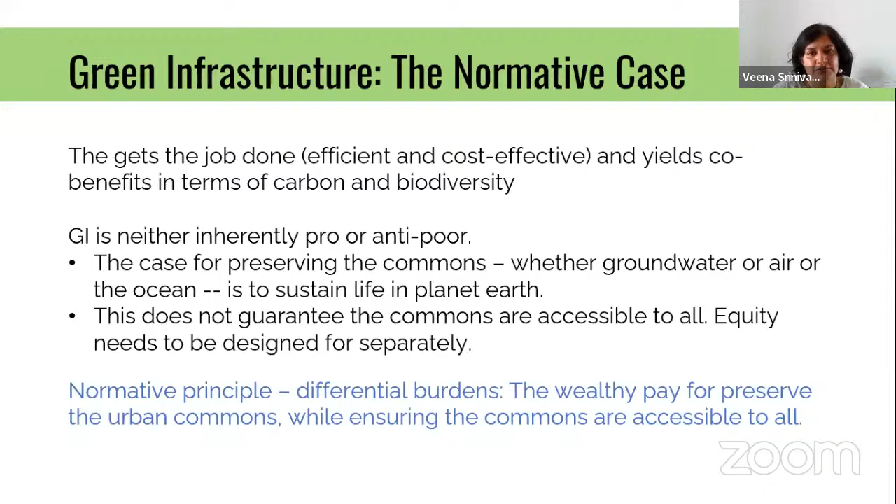Now, moving to the Indian context—obviously one of the problems we're having right now is that a lot of the discussion, the design principles emerging around water sensitive urban design and green infrastructure, are coming from the Western context. And of course, how we use our land and water in the Indian context is very, very different.

So we have a variety of purposes, and I've just shown you examples. One is very basic livelihoods, living, and hygiene, where communities continue to be dependent on our water bodies. Then there's the more emerging urban elite concerns with these urban water bodies, which include ecological aspects like bird watching and nature walks, and more of the yoga-at-the-lake, music-at-the-lake type of stuff. And then, of course, this is juxtaposed over our more traditional uses, particularly religious and cultural uses.

So when it comes to figuring out how do we design green infrastructure, the first principle is to figure out who is the community of users for this particular space and what do they want out of this space. Once we've laid out these purposes or objectives for creation of these spaces, then you can figure out what design elements would satisfy these.

Often you will find that some design elements conflict with other design elements. For example, if you need flood control, you need some of these spaces to be empty in the summer before the start of the monsoon. But if you want them used for recreational purposes, you might want a little bit of water so that you can maintain certain birding communities and roosting habitats. Ultimately, this question cannot be settled without first determining what people want out of the space.

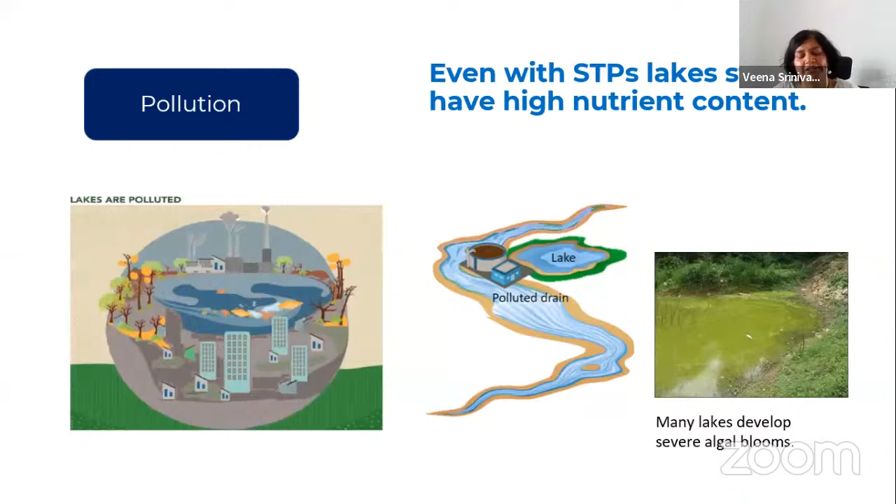The challenge here is how do we manage that nutrient balance in a very reasonable way, through use of constructed wetlands, floating wetlands, and so on. So you're uptaking some of the nutrients fast enough, ensuring that the lake doesn't tip over into the situation of having these massive cyanobacterial blooms, which are actually harmful.

And then the last bit is that often one of the simple, what I call the band-aid fix ways that our lawmakers handle the lake situation because of sewage ingress into lakes, is by building these diversion drains, where they basically build a big wall between the drain and the lake to ensure that raw sewage is not entering the lake and it's diverted around it. As a result, you have the problem of throwing the baby out with the bathwater—there's no water entering these lakes at all.

When you lose your ability to store rainwater locally, you're allowing all that rainwater to drain down and then pumping it back up a thousand feet to the top of a mountain where your city is at the top. So you're unnecessarily creating this massive energy requirement of having the water flow down and pump back up, as well as losing basically any ability to control your water security locally.

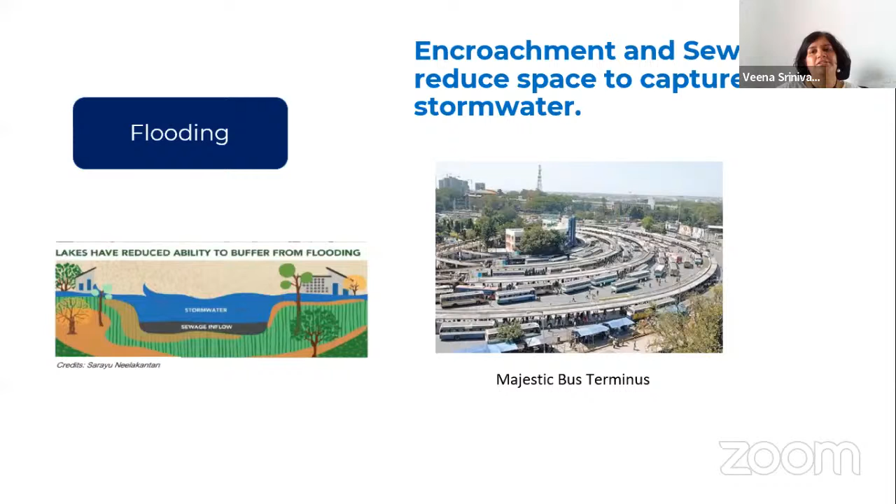Now, I would not mention this if it wasn't that lakes in smaller towns in India or South India are still being encroached. So I guess the very first step is to stop that.

Now, how do we solve this problem? I would say it involves a 4-step process: lake visioning, intervention design, blue-green infrastructure, and monitoring.

What do we mean by lake visioning? Because of that first step I talked about, where we have in India very diverse stakeholders around these lakes, the first step is basically to understand who all the stakeholders are and what they require from the lake. Doing this cleverly—which some lakes like Jaipur and Bangalore have done very well—doing this very sensitively to ask who are all the people who depend on this lake for livelihoods.

How do we ensure that we very cleverly put in physical infrastructure so that their needs are met without impinging on the benefits and enjoyment of the lake for other people? So if it's a Dhobi Ghat, then can we separately—instead of having them spoil the lake water—can it be done separately on one of the side drains?

If it's rituals like Ganesha immersion, most lakes in Bangalore have now created separate ritual ponds, what they call Kalyanis, so that only that is messed up and the main lake is kind of preserved. They do a very good job of managing the solid waste around that much smaller ritual pond. So the imagined physical vision of the lake emerges only after you understand who the stakeholders are and what they want out of it.

And then you set what the parameters are for how much area for cycling, how much area for birds, where is the nature zone of the lake, whether you want to use a zonation model or an interspersed model. All of this emerges once you've got the physical imagination, then you set what you call the service level benchmarks.

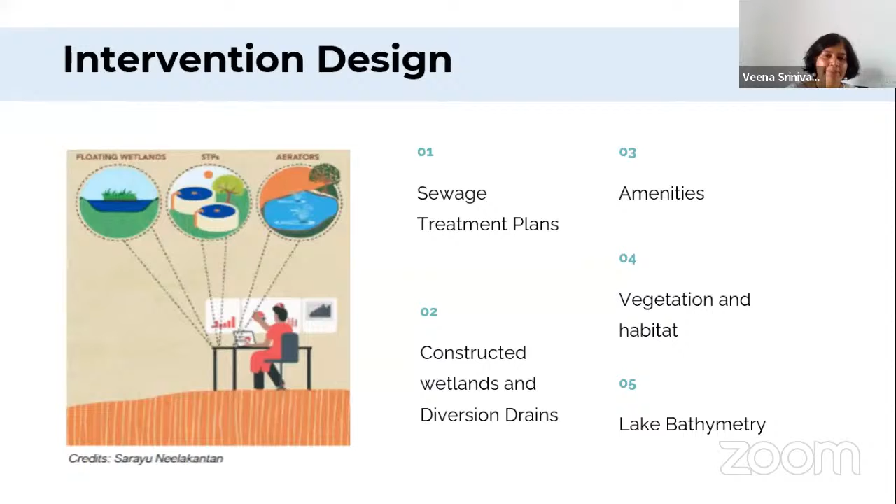The fourth and fifth ones I want to mention get a little short shrift in our Indian context, which is the ecology component. One thing we've realized working with ecologists around Bangalore's lakes is that design of the bathymetry of the lake matters. Instead of a soup bowl, how can you make a gradation design? How do you classify lakes into small and big lakes, and imagine different ecological functions they might serve? Small lakes might be meant for small birds and small fish, while big lakes are meant for commercial fishing and pelicans. So instead of a piece-by-piece approach, take a landscape approach, looking at all your big and small lakes as a matrix, where different ones have different functions and purposes, and therefore the design of the bathymetry and habitat can be very variable.

The third piece is the blue-green-gray infrastructure plan, and here I think in India we have a big problem - we really don't have good simulations. I'm a modeler, so I love simulation of blue-green infrastructure. But one of the big problems is that our sanitation plans, or sewerage plans, and our stormwater plans don't talk to each other. We're really talking about systems where sewage is going into stormwater drains and then entering these water bodies. So if we don't separate our sewerage and stormwater plans, saying at which points they intersect and what the treatment of water is, that needs to be properly simulated with a proper consultant brought in to develop a blue-green-gray infrastructure plan. That's a huge gap.

And then, of course, there's the regulatory structures, the operational plans, and the capacity building of agencies to handle this. We are barely able to get our agencies to have staff capacitated to run sewage treatment plants. Now we are talking about them handling blue-green-gray infrastructure. The capacity simply doesn't exist.

And then financing remains an issue. In India, at least to my understanding, financing has remained restricted largely to gray infrastructure. Green infrastructure financing is still kind of small scale, philanthropically funded. So how do we change that so we're able to get service level benchmarks for our green infrastructure as well?

And the last bit is how do you ensure that - I'm talking about lakes, so lake health, but in the larger case, green infrastructure - is actually healthy in the long run. In the Bangalore case, we did many consultations to figure out the minimum set of things we need to be monitoring over time to ensure our lakes are healthy: physical assets, biological assets, and water quality. For water quality, it became a question of which parameters. After a long set of consultations, we decided the most important things are the three that go into the trophic status - phosphate, transparency, and chlorophyll A - which determine whether the lake is eutrophic or hypereutrophic, and that's the most important thing.

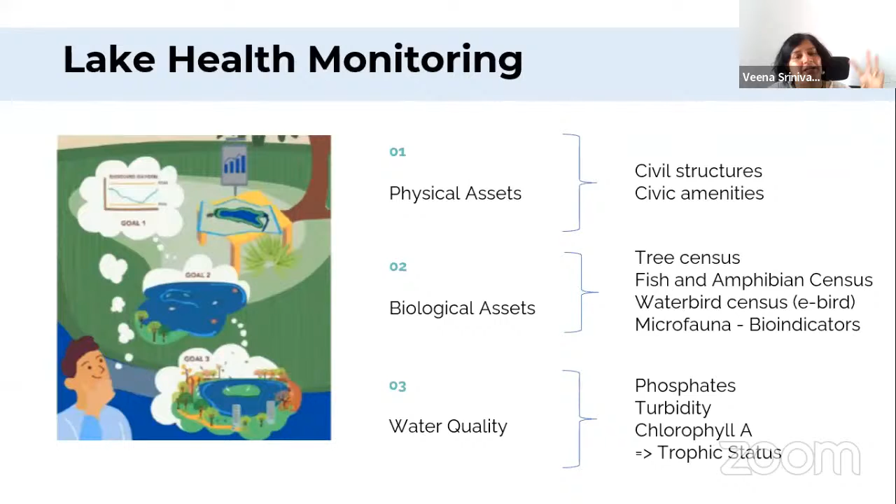This requires some contextual work in our Indian context. As I said, we need to really do this for each of those large typologies of the socio-hydrological context we're talking about. Thank you very much for listening, and thanks for the invitation.

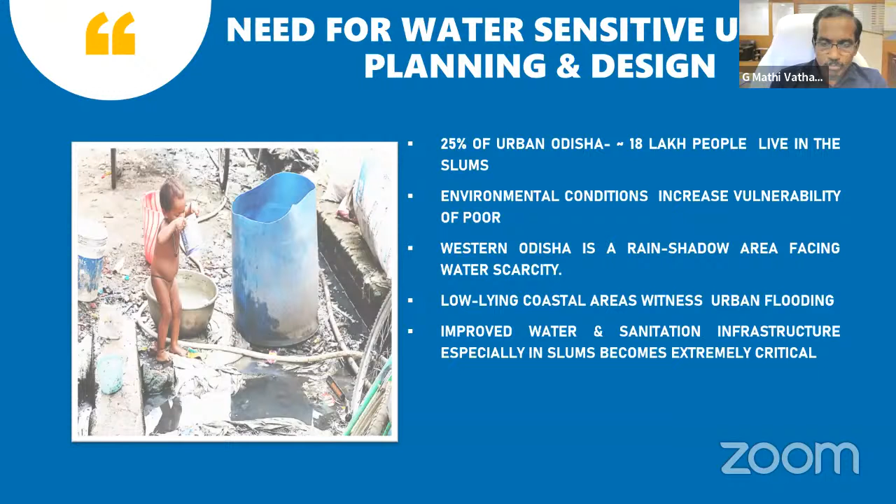They witness urban flooding every year, and currently also there is large-scale flooding. This makes climate resilient and improved water and sanitation infrastructure critical for making our cities water sensitive.

Our focus has been on harvesting the rainwater as much as possible, the Catch the Rain campaign, and access to safe tap water at every home. When we talk about water sensitive, we want to talk about water security, especially for the urban poor.

When we talk about sanitation, we need to talk about access to individual household toilets and achieving open defecation free status, and also open discharge free status through safe treatment and disposal of sewage.

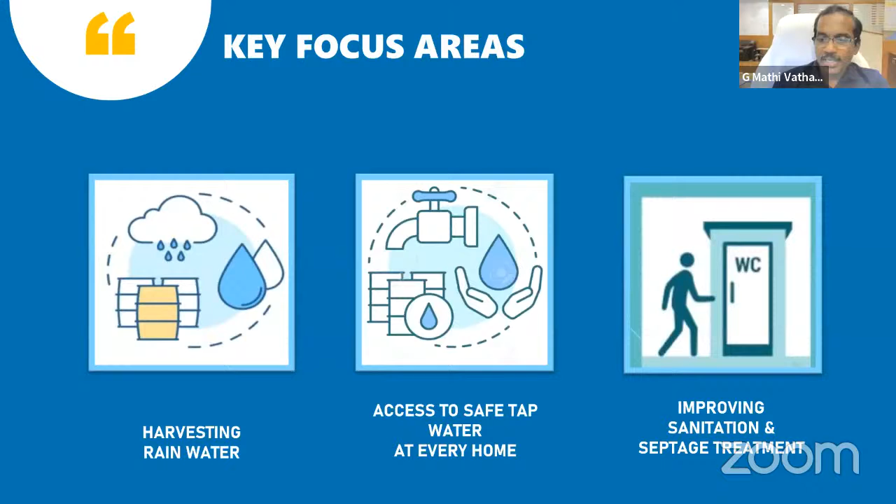Under Mukta, our flagship program launched during the COVID pandemic, which has now become a regular scheme, we take up climate resilient, community-based blue-green infrastructures. Rainwater harvesting structures have been one of the major components of this project.

We started the Catch the Rain campaign sometime in 2020, in partnership with CSE, thanks to Dr. Suresh, who signed the agreement with us. CSE has been our knowledge partner, helping us transfer knowledge to our engineers and planners in the cities and corporation areas.

In 2020, we took this up on a pilot basis, focusing on 5 major large corporations and development authorities. About 500 rainwater harvesting structures were taken up in the first year, focusing on vacant land, public parks, playgrounds, and open space available in government as well as private institutions, colleges, and hospitals.

Our USP is that we implemented the rainwater harvesting structures in partnership with the community, with Women's Self-Help Groups and the Slum Dweller Association, on a big scale.

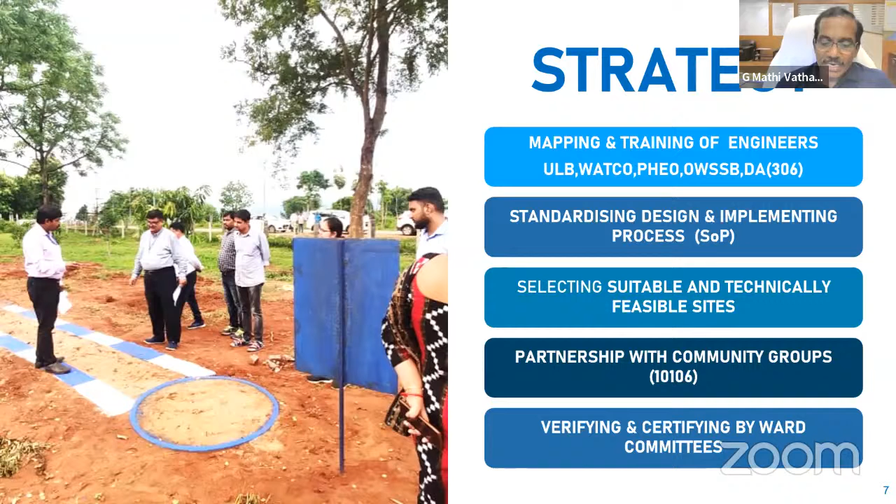We have come up with standardized design and implementing protocol, partnered with community-based institutions like Women's Self-Help Groups and the Slum Dwellers Association, and the ward committees have been roped in for verifying and validating the construction and maintenance.

In 2020, we achieved 500 rainwater harvesting structures on a pilot basis. In 2021, it was in campaign mode, where in 60 days we achieved, and in 75 days we achieved 10,000 rainwater harvesting structures. We even had a tweet by the Honorable Minister, Government of India.

In 2022, we expanded our scope, brought in additional players, and in 60 days we achieved 20,000 rainwater harvesting structures. By July 19th, we hit the magic number of 22,222 rainwater harvesting structures, all done by our community partners.

When we talk about city-wide inclusive sanitation, we need to talk about the availability of water, access to safe, clean water at the household level, and access to toilet. When we talk about the toilet, we don't mean public toilets and community toilets. We talk about access for individual families to an exclusive toilet.

We realize that in the ODF campaign, we achieved ODF status, but the community toilet system, where you tag an urban poor or slum settlement to a community toilet, does not ensure the sustainability of ODF. We have seen how communities lapse from ODF status. So we realized that access to individual household toilets is a non-negotiable agenda for us. That alone can ensure sustainable ODF in the cities.

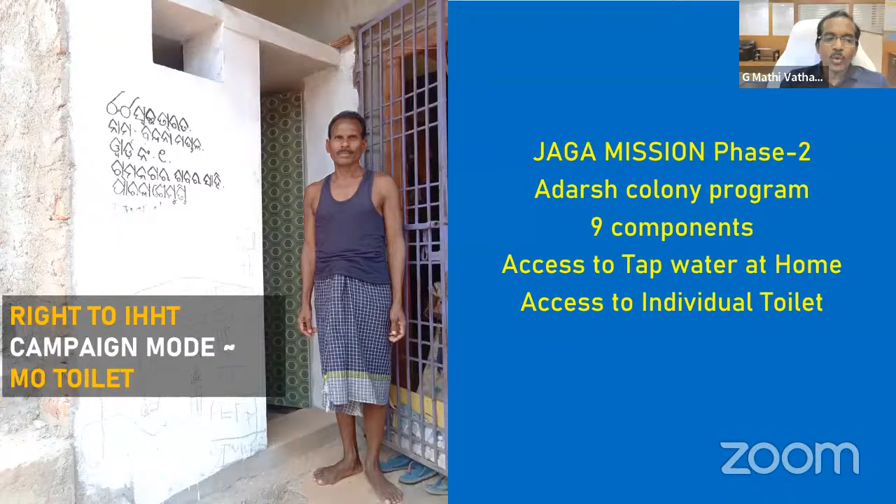So as part of Jaga Mission phase 2, we have included the right to tap water at home and the right to an individual toilet as essential components of our Adarsh Colony program, our phase 2, that is transforming a slum into a livable habitat. Our philosophy is right to tap water at home, right to individual household toilet, and we have taken up this toilet mission on a campaign mode.

For the individual, there is a subsidy of about 8,000 rupees, which may not be sufficient. So we are leveraging SBM Urban, PMAY, the 15th Finance Commission grant, and other resources available to provide enough subsidy for the poorest of the poor who are yet to make individual toilets even after 7 years of SBM.

The innovation we have made is that if land is not available proximate to the household, we identify community land within the slum area in clusters and make clustered toilets. But the individual toilets are in cluster form, where every seat is earmarked for a family with a separate lock and key, and maintenance of that seat is the responsibility of the household. Whereas common infrastructure like water supply and electricity is maintained by the Slum Dweller Association.

It is a joint venture of individual households and the Slum Dweller Association, which under the Jaga Mission plays a critical role in ensuring slums are saturated with 100% household toilets and 100% household tap connections, and are declared open defecation free, maintaining that status. Ownership is now given to the Slum Dweller Association, which has signed an MOU with the city commissioner as part of the Jaga Mission.

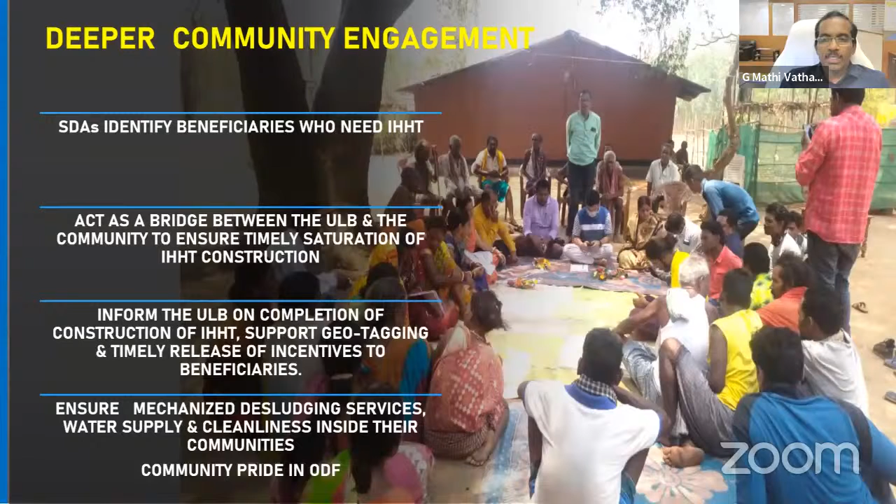The city transfers funds for capex and opex to the Slum Dweller Association. We have amended our Odisha Municipal Act to earmark 25% of available capex funds to the Slum Dweller Association for spending in urban poor areas. We have strategy, policy, guidelines, and IEC materials for making this toilet mission a reality, with deeper community engagement ensuring tap water and individual toilets are available for every household. The community takes pride in declaring slums open defecation free.

The Slum Dweller Association has identified more than 80,000 families who were earlier dependent on community toilets and are now due for individual household toilets. We have made cost-effective prototype designs for this. We are converging funds from various sources like Swachh Bharat Mission, Jaga Mission, and Pradhan Mantri Awas Yojana, and the saturation of 100% toilets is verified by the community. We have put in a social audit system where Women Self-Help Groups and the Slum Dweller Association verify each toilet constructed for individual households and its continued usage, then certify it.

Coming to FSSM, as I said, when we talk about sanitation, we talk about open defecation free, as well as open discharge free, to make sure septage is not indiscriminately discharged in the open.

5 years ago, when we started the journey, only 3 cities had a partial sewer network. There were no septage treatment plants, open defecation was rampant, and open discharge was rampant. There was no FSTP, and all the cesspool vehicles were discharging the septage in the open field only. 98% of the fecal matter was contaminating the groundwater and surface water, there was an absence of public awareness, and there were no FSM regulations.

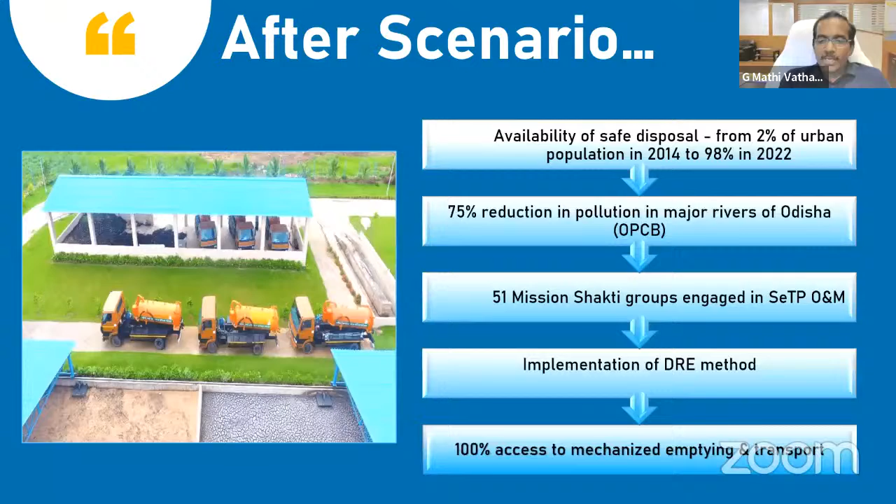We have ensured 100% access to mechanized septage desludging mechanisms, and we have partnered with women self-help groups and transgender groups. 106 FSTPs have been set up in 105 cities, and we have planned to saturate the entire state, covering all 115 cities by December 2022.

These are some photographs of the FSTP plants, where we are engaging the women self-help groups end to end in the sanitation value chain, right from constructing a public toilet or community toilet, maintaining the toilet, to owning the cesspool vehicle, operating the cesspool vehicle, and operating and managing the FSTP plants. End to end, we have engaged the women self-help groups and transgender groups.

Coming to water security, access to tap water has been our philosophy. In 2015, this was our scenario, common to any other city. Only 40% of the areas had network, only 30% of the population had house connections, with erratic and intermittent supply, and disparity in water availability within the city as well as between cities.

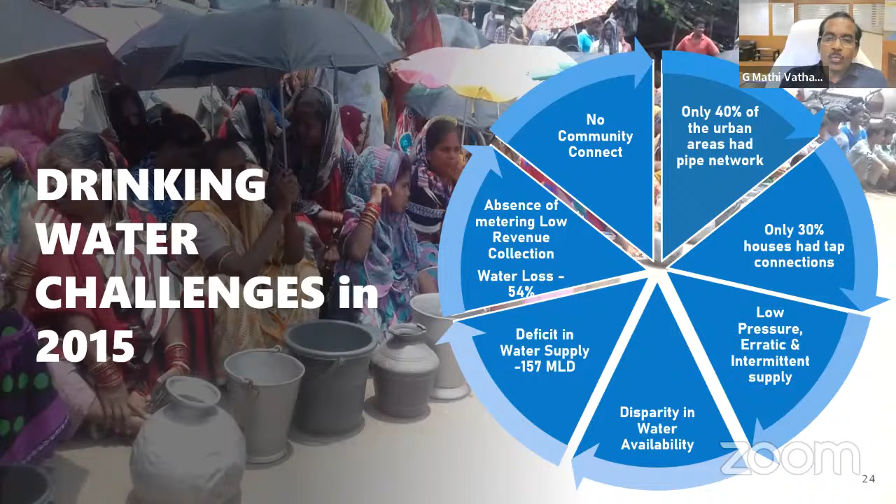There was a huge deficit in water availability, a 157 MLD shortfall. There was no metering, and revenue collection was poor. Water loss was to the tune of 50 to 60%. And frequent incidences of jaundice, hepatitis, and diarrhea were the order of the day.

We had a vision to ensure 100% house connections with tap water, with adequate quantity and reasonable quality in all houses. We started the mission, and now we have reached the Sujal mission, the drink-from-tap mission. The principle is the right to assured quality tap water at every home. Now in 2022, I'm happy to share that 97% of households have access to tap water.

We have increased household connections from 3.3 lakh to 9.8 lakh now. Out of 115 cities, 85 cities have achieved 100% house connection status. They are declared as 100% house connection covered.

We have also moved to a higher orbit, from drink-from-tap to providing 24/7 directly drinkable quality water in house taps, being implemented in four cities. We started with Puri, covered Bhubaneswar, Cuttack, and Berhampur partially, and it's being implemented in altogether 20 cities. Right now, about 6 lakh population have access to IS 10,500 mineral quality water in their homes.

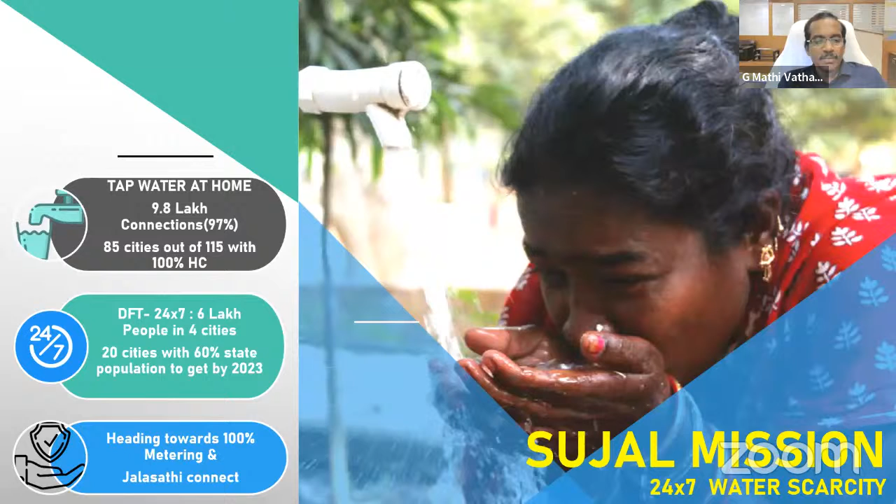By 2023, we expect to achieve drink-from-tap in all 20 cities, with 60% of the state's population getting access to IS 10,500 water. We started with zero metering, as I said. Now we are heading towards 100% metering, with focus on revenue collection to ensure sustainability. We have also deployed community partners in the management of water distribution.

Jalasathis are our community partners, women self-help groups empowered to manage water distribution at the ward level. They act as a bridge between the water supply authorities and the consumers, and they work on a performance-linked incentive basis. This is the impact of our investment and initiative in water.

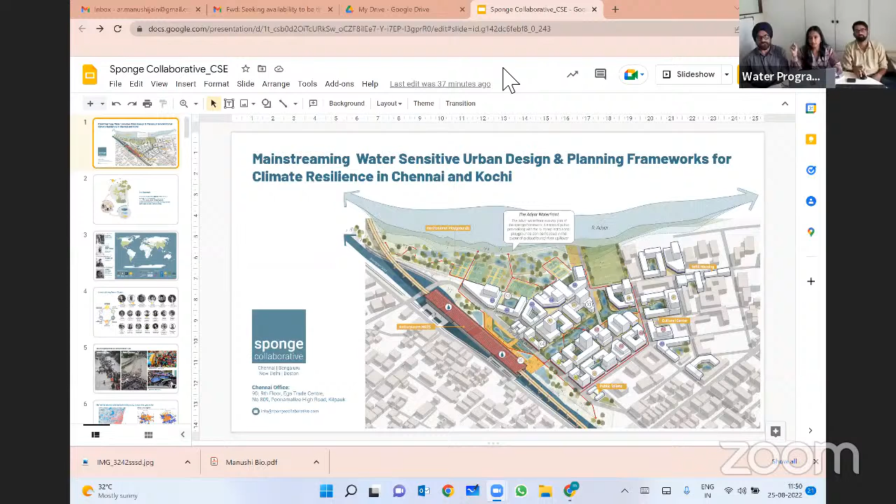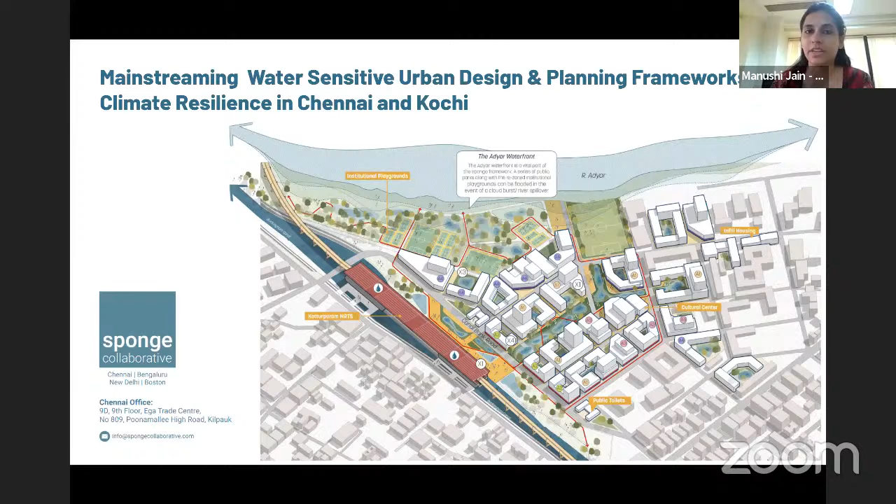Hello everyone, good morning, and thank you for inviting us to this webinar. I'm going to share today a little bit about our projects and the work that we do at Sponge Collaborative, the vision that we have for water sensitive urban design and planning frameworks through some of our projects in Chennai and Kochi. We're a strategic planning and design firm based in Chennai and Bangalore.

We take a systems approach where we foreground ecology and community in the forefront of all the design projects that we do. We integrate blue-green infrastructure, sustainable mobility, look at inclusive housing, and create vibrant public spaces for creating resilient cities.

Before we started Sponge Collaborative about 2 years ago, the 4 of us in the partnership were involved in working with a lot of public and private sector clients in our previous experiences with Sasaki, AECOM, SLA, and we worked across 60 cities in the world before we came back to India and decided to start this. Today we're a team of about 20 experts, all interdisciplinary, and we bridge the gap between urban design, architecture, landscape architecture, social development, and take it all the way to implementation projects and product design.

How we began our journey is we are a group of people aware of the climate risks happening in Indian cities like flooding, heat waves, and droughts. Most of this is because of unplanned urbanization, or outdated and unregulated infrastructure. How we are trying to tackle these issues is by promoting nature-based solutions and looking at 4 key principles while doing that.

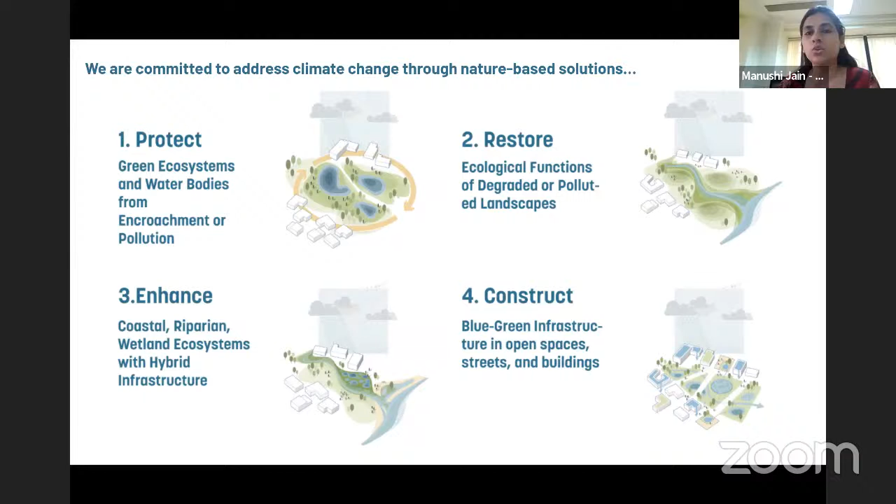We look at how we can protect the existing landscapes that are already there, which can provide the benefits of a nature-based solution. We're trying to restore the critical riparian edges, and enhance existing ecosystems which may be degraded or polluted, and construct new infrastructure, which we call blue-green infrastructure, within the urban fabric.

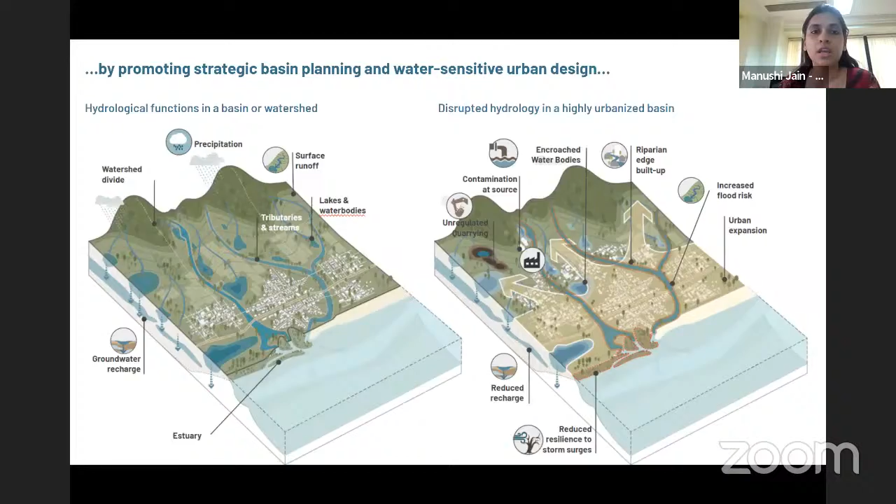How we're promoting this is we take a strategic basin level planning approach where we identify the issues at the largest scale and then try to come up with solutions for them. In any typical urban fabric, we know that most of the surfaces are impermeable, and because of that there's a lot of surface runoff during a cloudburst event, which leads to flooding.

Now, by leveraging our open spaces, streets, and buildings, and by mainstreaming the blue-green infrastructure planning approach, we can mitigate the flooding and create infrastructure that can hold and delay water before it overwhelms our system, thereby making it more resilient.

This comes with multiple co-benefits because you're able to recharge your aquifer, do rainwater harvesting, bring in urban greening and biodiversity, cool the microclimate, improve the air quality, upgrade our public realm, and also create placemaking.

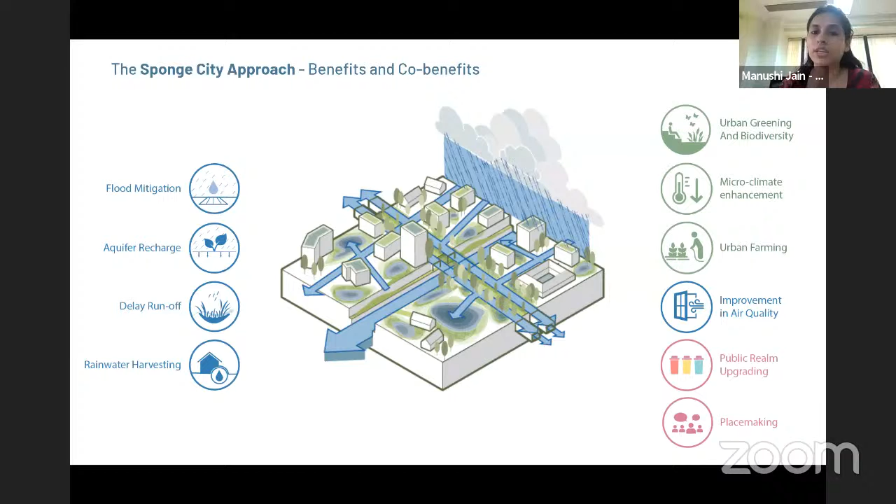Today I want to show 3 different scales in which we are trying to bring this approach in our projects, from strategic basin planning to sponge planning neighborhood framework, and then also how we're demonstrating it through pilot projects through sponge open spaces. So the first project is the Adyar River Basin Vision.

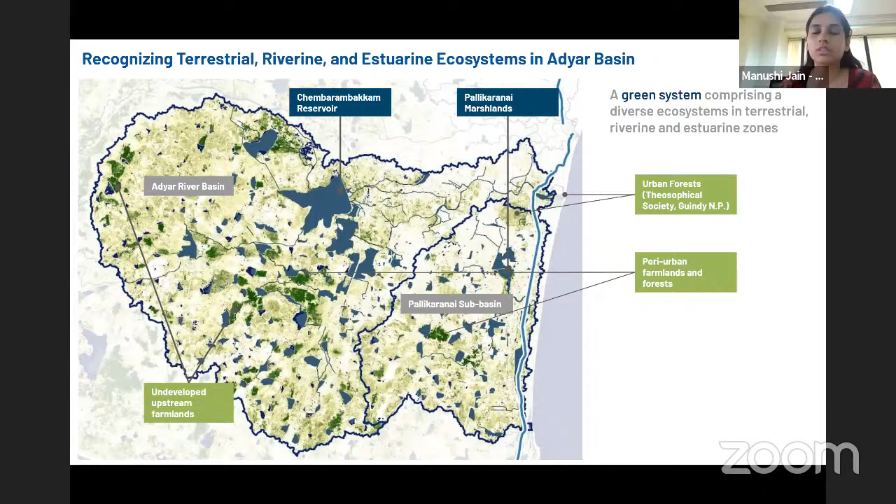Adyar is one of the most urbanized rivers in Chennai, and it faces issues of flooding and sewage disposal. Chennai city comprises about 5 major basins, and the Adyar Basin itself is a very critical hydrological system comprising a network of streams and catchment areas. It also has a very interlinked green system with diverse ecosystems of terrestrial, riverine, and estuarine zones.

How we began this project is we started with a rigorous data and visual mapping exercise, because a lot of open source data is not sufficient or does not actually cater to all the existing conditions. So we also did a visual mapping where we walked the entire stretch of the river and monitored it.

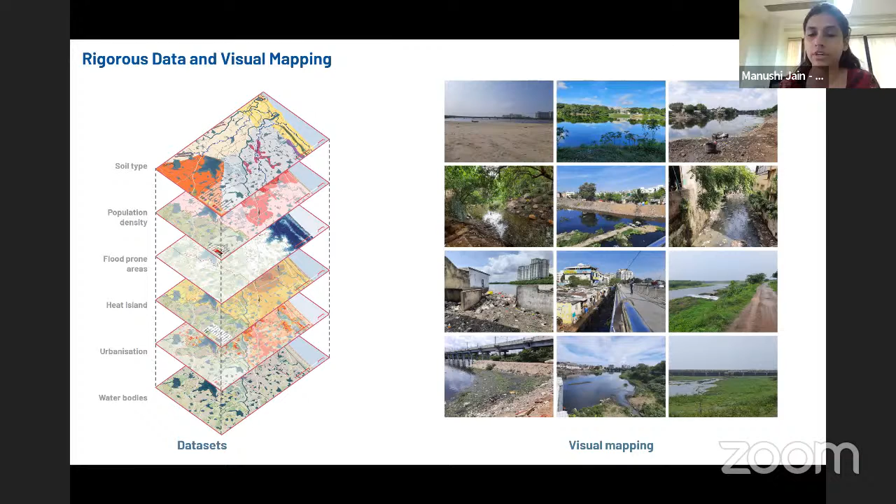We came up with thematic maps to raise the issues of flooding and infrastructure risk that the river is facing, as well as accessibility problems in the river, and mapped some of the existing open reserve lands around this river.

We also looked at the land use, the logistical corridors, and the predominant urbanization growth patterns along the river. After we initially did our data mapping, we held a technical stakeholder workshop.

Based on all the feedback we received in our technical workshop, we consolidated all that data and information to create 5 different frameworks, which would help us understand how urban growth can be tied into ecological rejuvenation and help in long-term metropolitan planning, by identifying within these frameworks goals and strategies and pilot projects that can be implemented.

We looked at how the river can serve as an ecological corridor connecting the blue-green systems, how it can serve as critical infrastructure by having riparian resilient edges, and looking at it from the perspective of culture and livelihood as a connecting tool by which neighborhoods can identify.

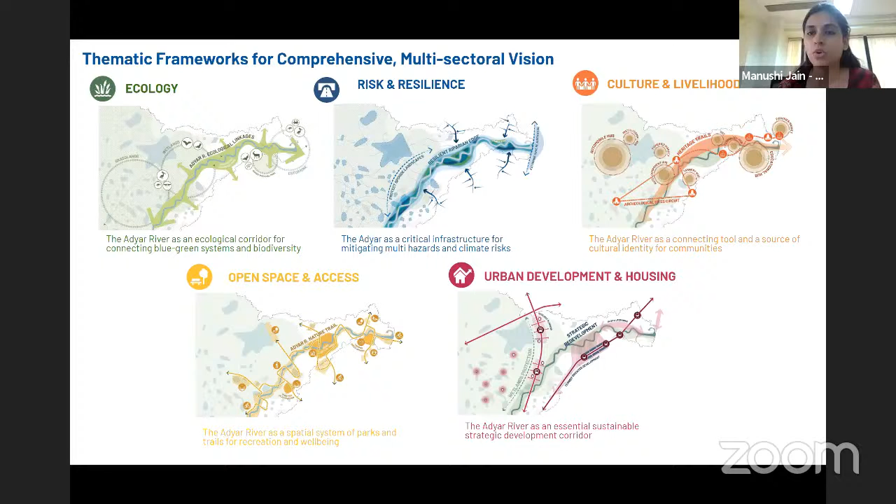We took all of these different strategies and started demonstrating them through visuals of transects, like urban visuals. These are speculative visions—they don't necessarily have to be implemented this way, but they help begin a conversation.

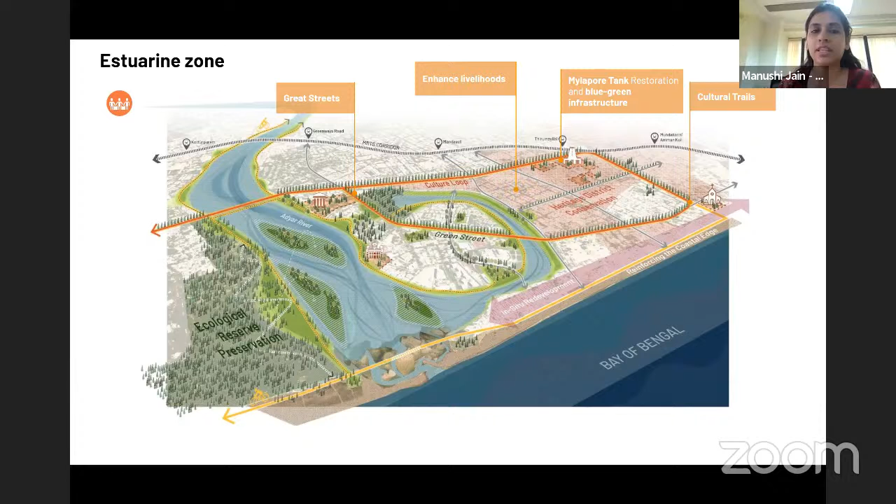We proposed multiple strategies and projects, phased into short-term, medium-term, and long-term projects, and looked at even peri-urban zones, which are rapidly urbanizing with new infrastructure proposed. So what does that mean for the city?

When all of these strategies are achieved, this is what the vision of the city, the Adyar River, would look like, and this is how it could integrate with our city itself.

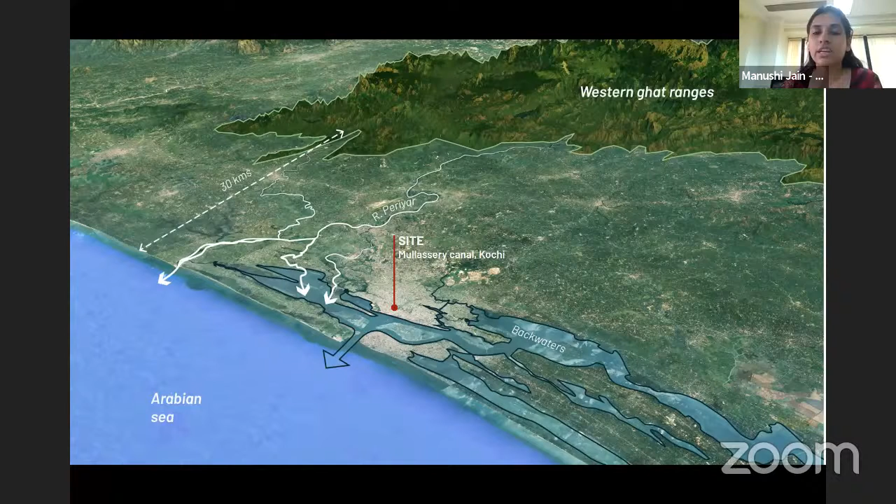Now, the second scale I want to talk about is the sponge planning framework, or the neighborhood scale. We always take the metropolitan or regional approach in understanding our sites. This is our site in Kochi, the Mulassery Canal, in Ernakulam, which is a system of backwaters very close to the Western Ghats.

Two of the predominant issues they face are decreased greenery and flooding. We are looking at a 1.3 kilometer stretch of the Mulassery Canal, which is mostly covered and probably just used for sewage disposal now.

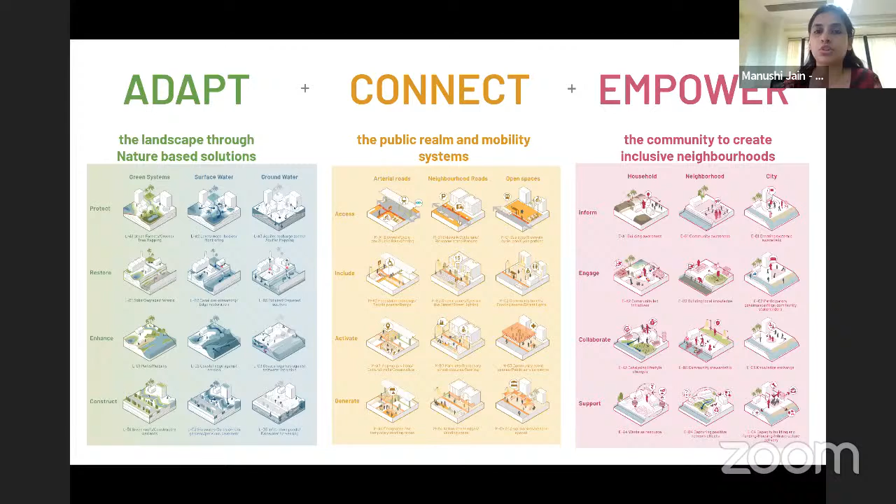We came up with toolkits, starting off with the Enter Kochi competition. In the competition, we created a toolkit not just for nature-based solutions, but also looked at the mobility system and the community system.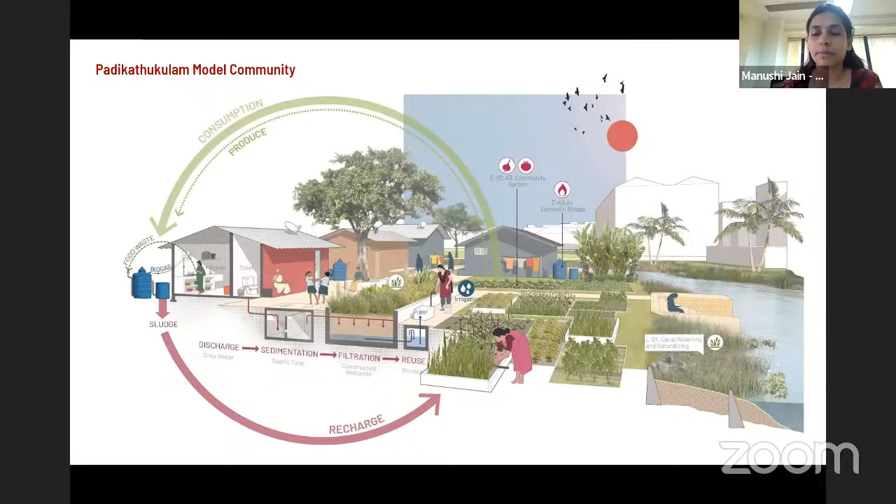We created a larger framework for the canal and its surrounding areas and proposed pilot projects within it as well. Now I'd like to explain a bit about our process after the competition, when we got onboarded on the project.

We began with a bunch of stakeholder engagements and getting buy-in from community representatives for the design ideas we had done preliminarily at the competition stage.

Then we got into the details of understanding the site more and devised an entire canal master plan framework, where we came up with strategies for daylighting and also strategies for canal widening, making more room for the canal and creating resilient riparian edges.

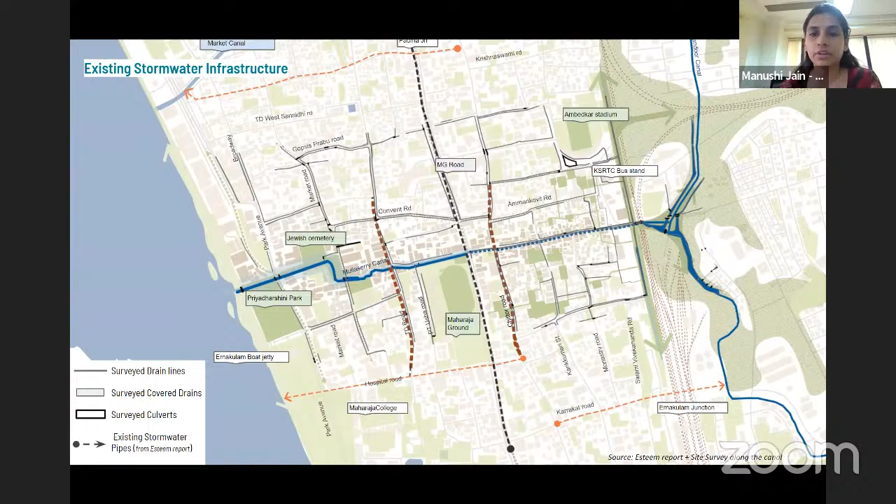For the entire neighborhood itself, we wanted to address how we can tackle flooding issues during a cloudburst event. So we began by understanding the stormwater infrastructure of the neighborhood and mapping out which areas flood during a cloudburst.

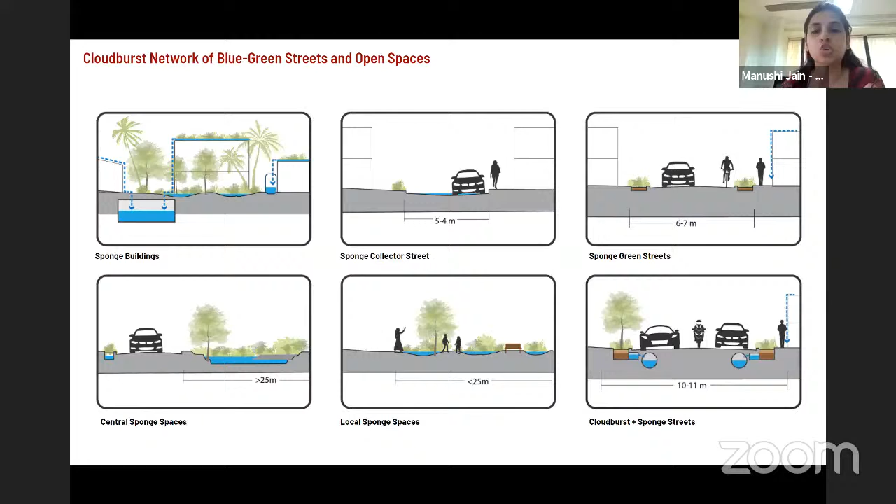So we introduced a network of blue-green streets and blue-green open spaces, creating a toolkit of collector streets, green streets, sponge open spaces, and local sponge spaces, which when integrated within our fabric could help in flood mitigation and allow aquifer recharge, or at least delay the water before it hits the larger water system.

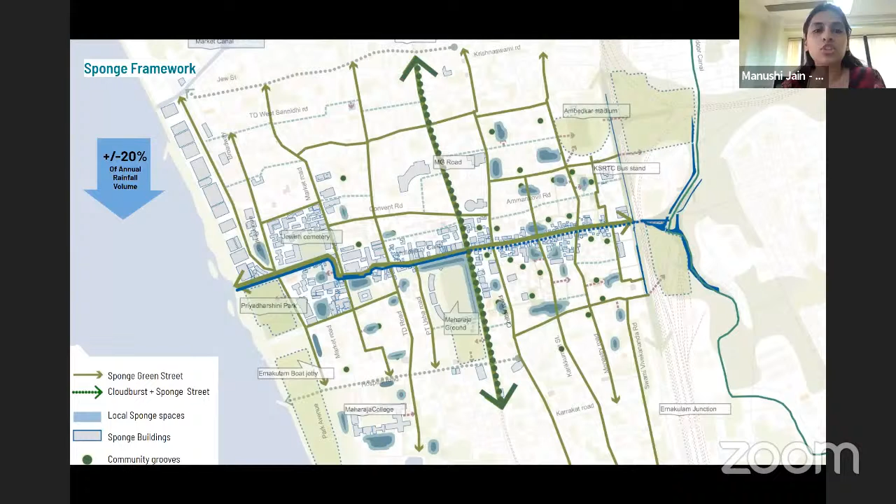So we demonstrated what that means during a 10%, a 20%, and a 70% annual rainfall. Thereby, you're saving all of your critical infrastructure and having very curated areas, identifying critical areas that are allowed to flood.

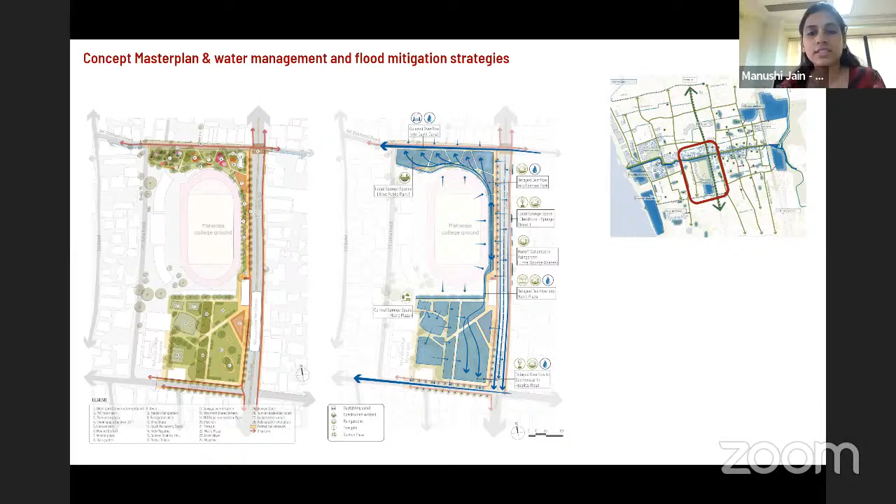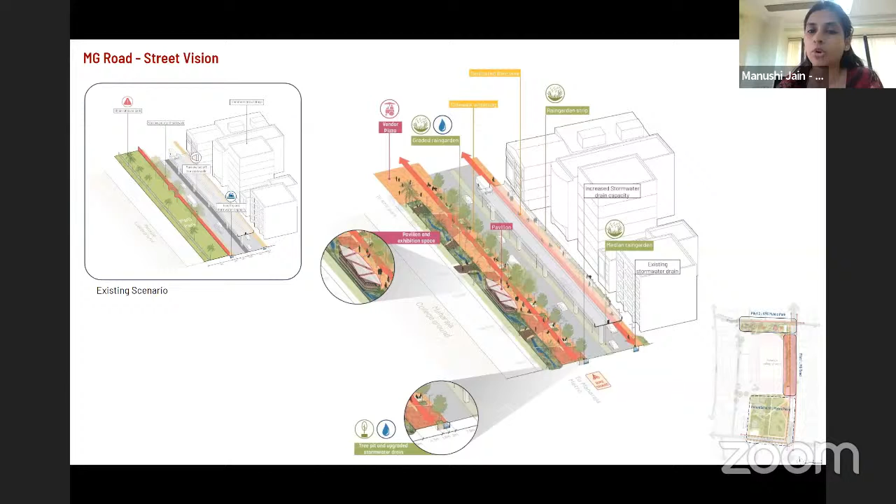Now we took this all the way to a detailed project report from a framework level, where we identified a sub-site and demonstrated how a collector street could be designed. The existing MG Road had a lack of sidewalk, lack of street light, and was unsafe for women and children. We transformed it into a boulevard with rain gardens, cycle tracks, and tree pits, enhancing stormwater infrastructure while also enabling placemaking and creating a good streetscape. We demonstrated how water movement would follow the proposed design, and how these infrastructures have multiple benefits of resiliency in mitigating flooding.

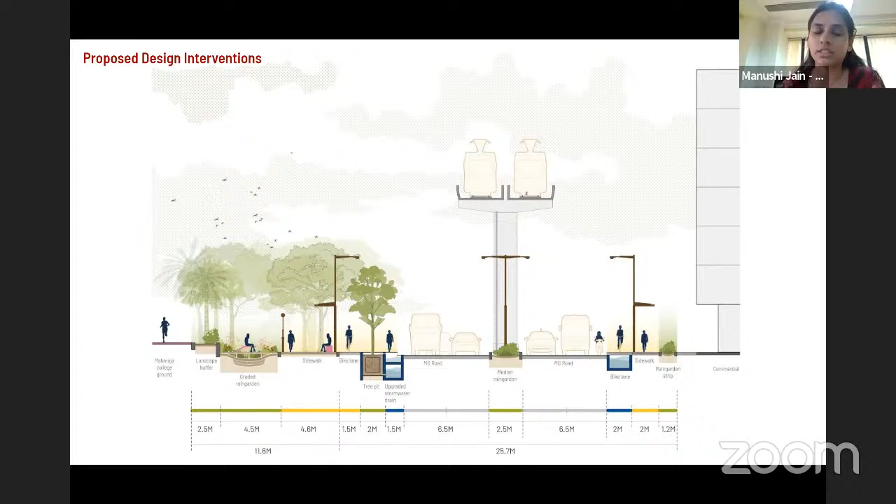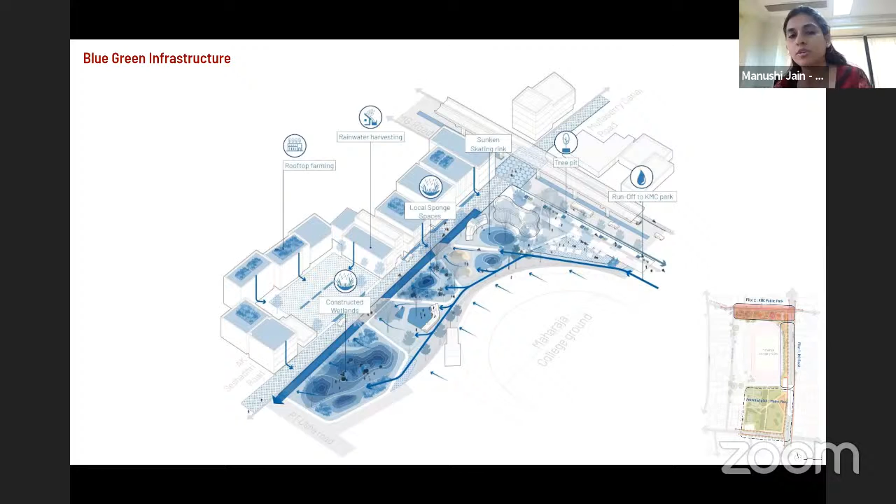And we did the same for an open space. There was a dilapidated public open space owned by the Kochi Municipal Corporation. We came up with strategies for proposing NMT, creating a woonerf, daylighting the canal, and also promoting livelihood by creating vendor zones, demonstrating the same in terms of a blue drawing to show what the water movement would look like after the site is regraded and we've introduced blue-green infrastructure. This is what the vision would look like when completed.

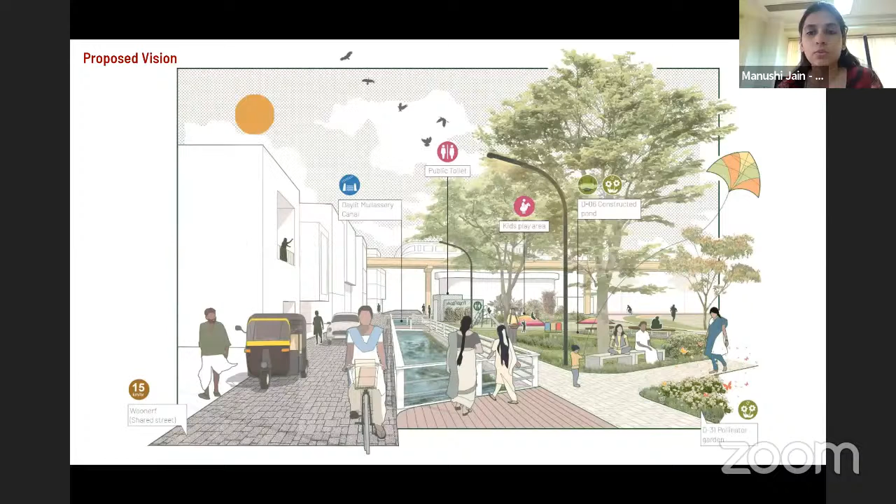And then we took it all the way to detailed drawings and bill of quantities. This document was submitted to the Kochi Municipal Corporation, and we are hoping for the implementation to happen. Through this project, we also identified the stakeholders and have engaged them all in the process.

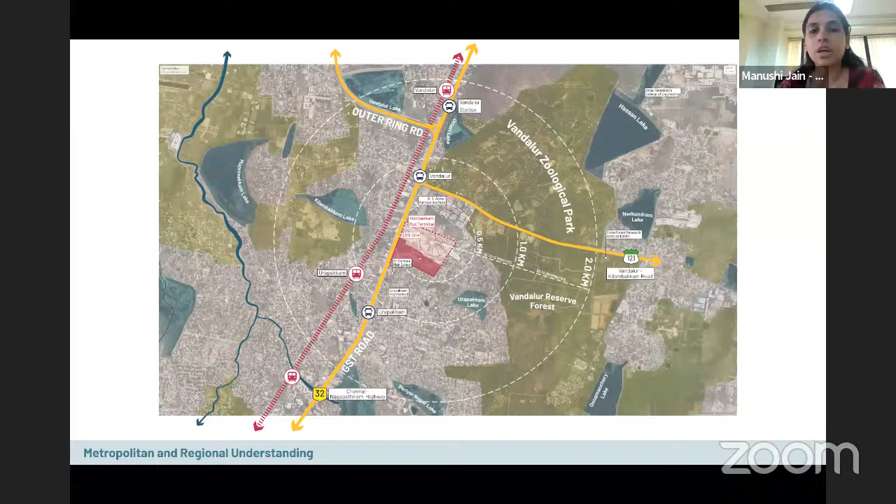At the third scale, because metropolitan scale or planning framework scale projects take a lot of time to get implemented, we also look at quick win projects like the sponge open space. We're currently doing one in the Kilambakkam New Mofussil bus terminal, located at the south entrance at the GST, Grand Southern Trunk Road in Chennai. It's a southern gateway to the city and part of a larger system with the Vandalur Zoological Eco Park in the Reserve Forest, connecting to a larger system of lakes around the site. The new Mofussil bus terminal is being constructed by the Chennai Metropolitan Development Authority, CMDA.

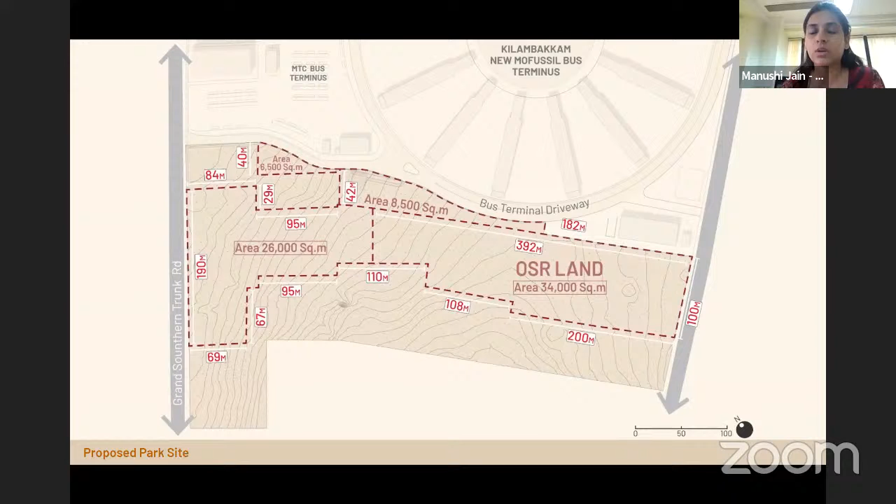They have 16 acres of land, which is a dedicated OSR and also a portion of land required for environmental impact clearance. Instead of just planting Miyawakis, they came about and said, why don't we do something different? So we made a pitch: why don't we leverage this site, since it has a footfall of about 50,000 people, to promote the regional ecologies and landscape of our state, and create awareness around climate change through demonstration projects around blue-green infrastructure.

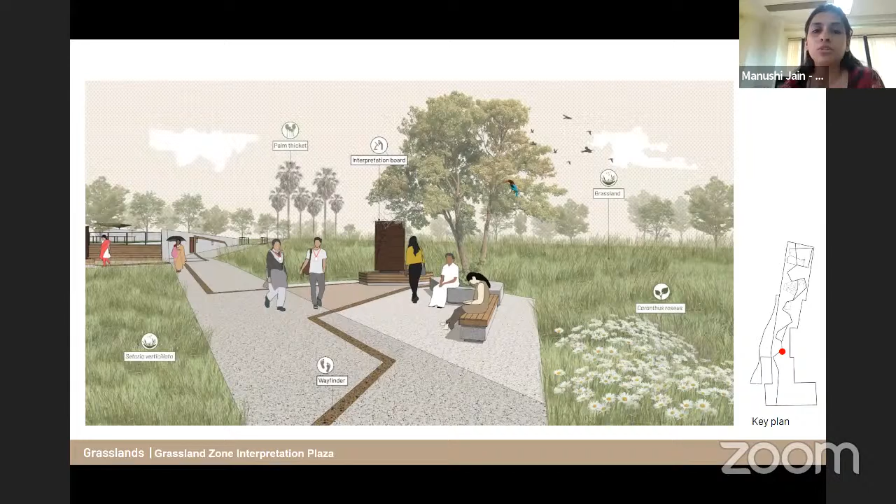We proposed multiple different strategies within this, like retention ponds and rain gardens, and integrated them with interpretation boards, signages, wayfinding methods, and also an interpretation center. We created different kinds of amenities and programs to activate the entire site.

We're currently also pushing this approach forward with the Greater Chennai Corporation, where we are looking at - as one of the points Ms. Veena mentioned from ATRI - the gap between blue-green infrastructure and grey infrastructure planning. We're currently engaged with Greater Chennai Corporation to understand the sponge city park approach and how we can apply it at zonal scales, then demonstrate and identify pilot projects that can be implemented where new stormwater drains are currently being constructed.

So some of the key takeaways through our learnings here: how we can create compelling visuals and storytelling to create the narrative and story for climate resiliency, and make awareness around climate risk. Also, integrating high-level visions with strategic pilot projects is a very critical move because it helps in buy-in from stakeholders. And creating institutional reform - there's a need for capacity building at the corporation level with municipal engineers as well as at the local level.

And then coming up with intergovernmental and multi-scalar coordination for blue-green infrastructure strategies. There's a need for procurement reform as well as blue-green financing, which will be very critical in helping scale these initiatives up and aid the implementation process.

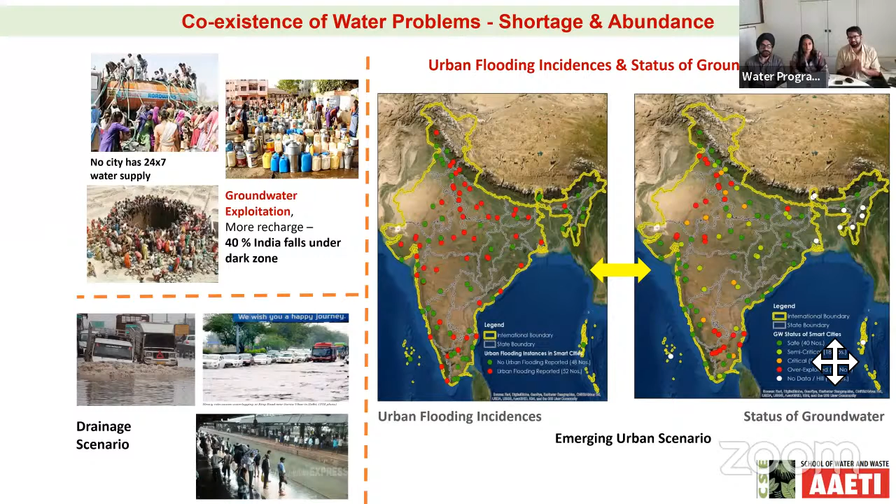So we've all seen issues of flooding and groundwater depletion in cities. We tried to map the smart cities of India, and we found that more than 50% of all smart cities have issues of flooding and actually have a very poor groundwater regime. In addition, you see lack of water supply in pre-monsoon seasons and abundance of runoff in post-monsoon seasons. So the idea is to look at these issues from the point of resilience as well, and address them through WSUDP and stormwater harvesting in particular.

We also looked at why cities will continue to grow in India. As a developing country, it needs cities for growth, and we will observe more urban area and more built-up area. So can we, like Manushi said, manage it in a way that's not unplanned, or maybe have a system in place to make sure that the water, or the hydrology, is actually built into land use planning itself.

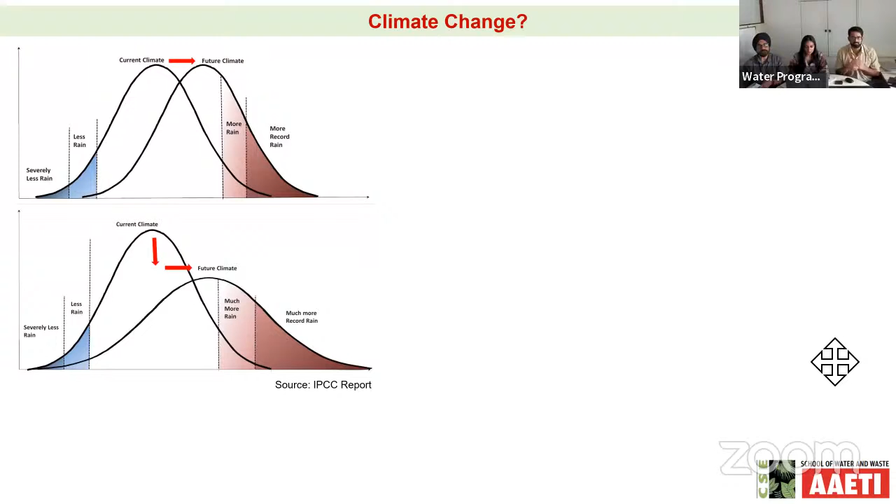We also looked at climate change as a determinant of runoff. Research from IPCC says we will be having more intense rainfall in fewer number of rain days, so your runoff calculations go for a toss in terms of designing infrastructure. We also looked at how the recent 2 monsoons in India have been behaving, trying to put some more weight behind the climate change discourse, that there is a considerable shift in the amount of rainfall happening across the seasons.

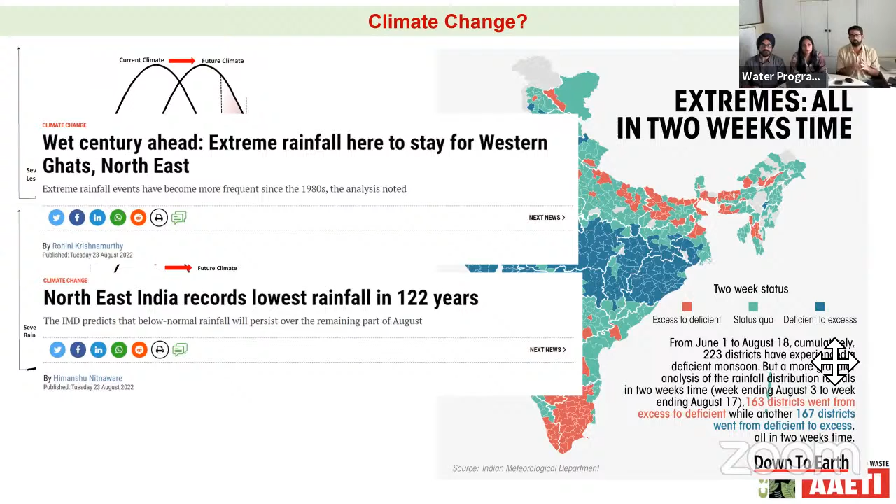We've seen that at various points in the monsoon, you have deficit and excess rainfall in various parts of the country. The Northeast has the lowest rainfall, but it's entirely flooded. Similarly, we see extreme rainfall, which is here to stay in the Northeast and the Western Ghats as well. So the idea of rainfall patterns being modified due to climate change is a reality, and maybe it's time to make a combination of green and grey infrastructure to address this issue as well.

Another statement from a lead scientist mentioned that the receding monsoons will go till October, so probably we will not have that month—the period is actually changing. So maybe look at rainfall as a changing pattern, and then look at WSUDP or stormwater harvesting as a key to address these climate change issues as well.

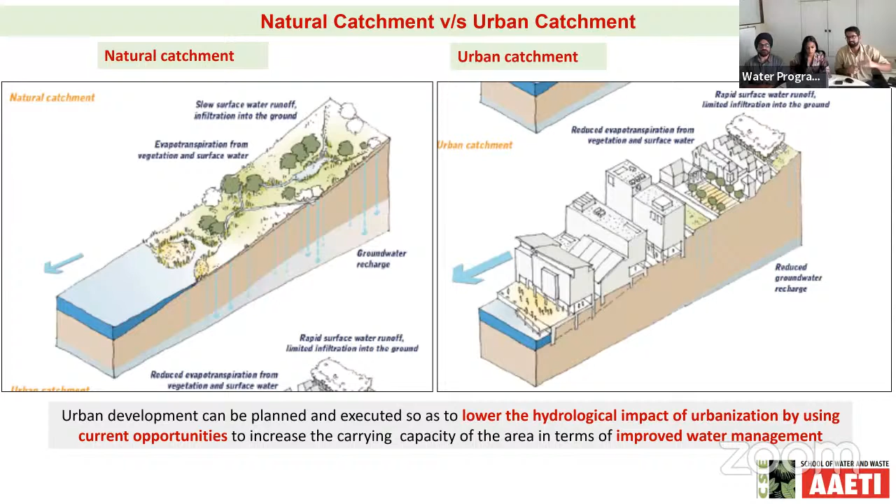As Manushi and Veena mentioned, the idea is that the urban catchment is more built up, so you have more runoff and less infiltration and evapotranspiration. That leads to a larger impact on the land itself, and you will have larger runoff at a high velocity. So maybe the idea is to implement strategies at different scales—regional scale, city scale, neighborhood scale, individual plot scale—and look at how to mimic the natural catchment, and how these interventions from stormwater harvesting can address particularly your water supply issues and flooding issues as well.

So CSE has worked on this WSUDP concept for more than a decade now, and they started with Dying Wisdom, where we looked at traditional structures of stormwater harvesting in different ecological zones in the country.

Then we moved at trying to make rainwater harvesting as a community approach, where it's everybody's business.

In 2016, we partnered with the Ministry, then MOUD, to develop some practitioners' guides on WSUDP and GI, where we actually looked at different scales of interventions on wastewater reuse, stormwater harvesting, and lake management.

Recently, we have developed a series of roadmap publications for the state of Odisha, for Delhi, and for Uttar Pradesh, as a particular intervention to advocate the principle of stormwater harvesting in parks and open spaces, and also see how they can be designed into the natural master planning framework.

We also developed an online web-based compendium called Seasons to promote or advocate for this issue, a collection of 75 plus case studies on different aspects of water and sanitation in the WSUDP framework.

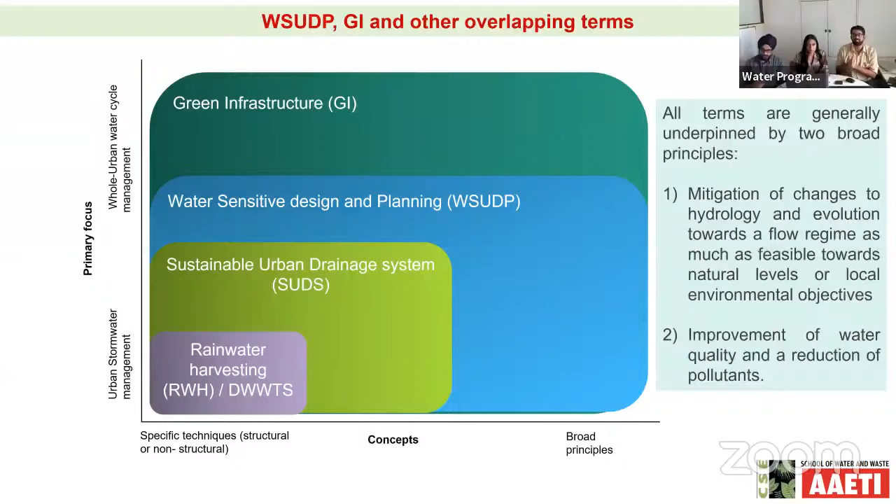So we defined a couple of terms in terms of what is GI or the WSUDP. For this particular session, we want to focus on SUDS and WSUDP at the city scale, and look at how they can be used to mitigate the changes in hydrology because of urbanization.

So again, the CSE approach, or WSUDP, is about protecting local water bodies, having stormwater management in public spaces, trying to reuse wastewater locally, and increasing water conservation by demand management.

And trying to do it in a context of adding social and environmental benefit to the citizens of India as well. The idea is to make sure our cities move towards being water sensitive.

We don't have to go the natural, developed countries' journey from water supply to sewer to drain. We can actually leapfrog from where we are right now, sewer or drain, to a water sensitive city.

The idea is to develop spaces, like Manushi mentioned, multifunctional spaces and infrastructure to make sure that your needs for water supply, managing floods, and livelihood are also met in these cities. That's the idea where we actually want to focus.

So again, the approach is to focus on stormwater as a resource, where we see that existing drainage systems are designed to take the runoff away as soon as possible. We want to make sure it is a resource and use it to recharge groundwater, or maybe have some lakes in store as well. So again, we are talking about three different scales.

For our approach, we look at the regional scale of a larger GI approach, where we want to plan for the regional plan, and look at the city and neighborhood scale as interventions for stormwater harvesting in parks and open spaces, because you plan these parks at this scale.

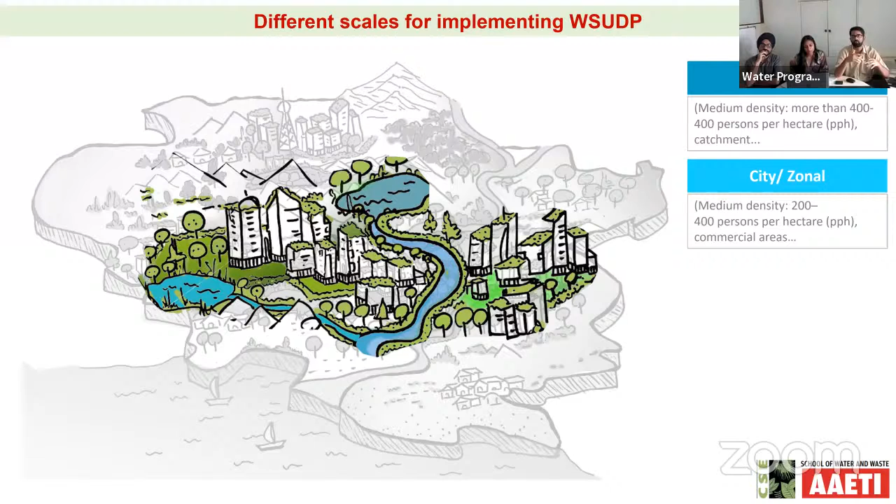There's a role of the master plan, the role of development happening generally. So that's the scale you want to intervene at, because different levels of parks and open spaces are planned at these different scales.

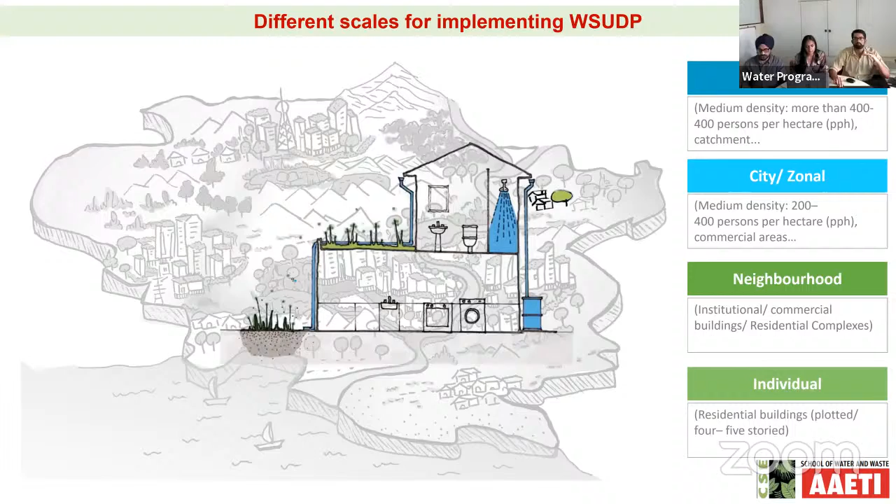Under the NMCG CSE partnership, we look at four aspects of WSUDP, which can be looked at for stormwater harvesting at all levels. First is to enhance urban groundwater, looking at stormwater as a resource and making sure groundwater is managed or enhanced through stormwater harvesting.

We look at water bodies' linkage with stormwater as well. We believe in the approach that stormwater harvesting is one of the most pristine ways to actually manage urban lakes, especially small water bodies, so maybe look at that as well.

Wherever possible, look at decentralized wastewater reuse, because our stormwater is not as pristine as you might think, and you need to have some sort of treatment happening to preserve stormwater as well.

Looking at the application context in India, we looked at the land use planning framework in the city. We looked at different sizes of towns, and we saw that there's a lot of scope in trying to implement stormwater harvesting, because as per the guidelines, you need as much as 20% of area under greens.

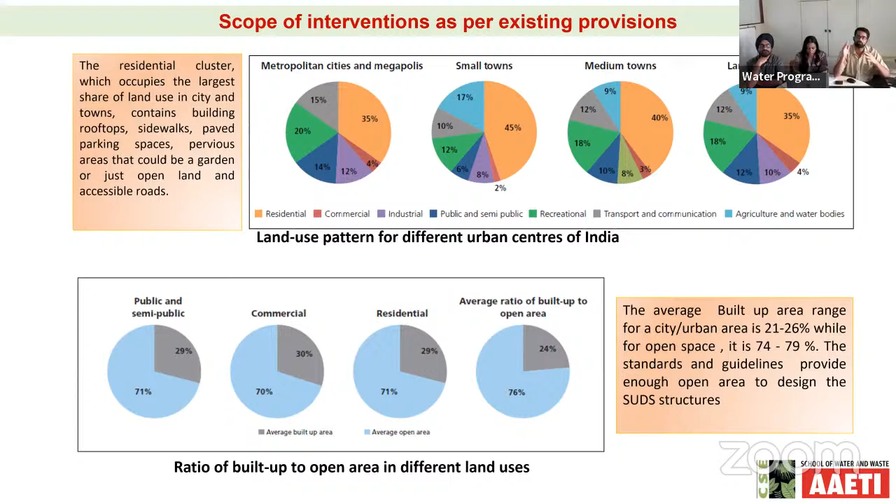You also have institutions, you also have commercial spaces. Like Manushi mentioned, the focus needs to shift from rooftop to actually public spaces, because that's a higher potential to harvest a lot of runoff.

We looked at per capita allocation of green spaces, and we saw that there is opportunity in almost all cities in India to actually develop parks, and because you have parks, you will have an opportunity to do stormwater harvesting there as well. We looked at the guidelines of trying to map planned open spaces.

So we know that for a city of 10 lakh population, you need at least 686 hectares of parks and open spaces of different scales.

So that's an opportunity area right over there. A population of 10 lakh would actually have 680 plus hectares of parks which are planned, and they can be used for stormwater harvesting or wastewater reuse as well.

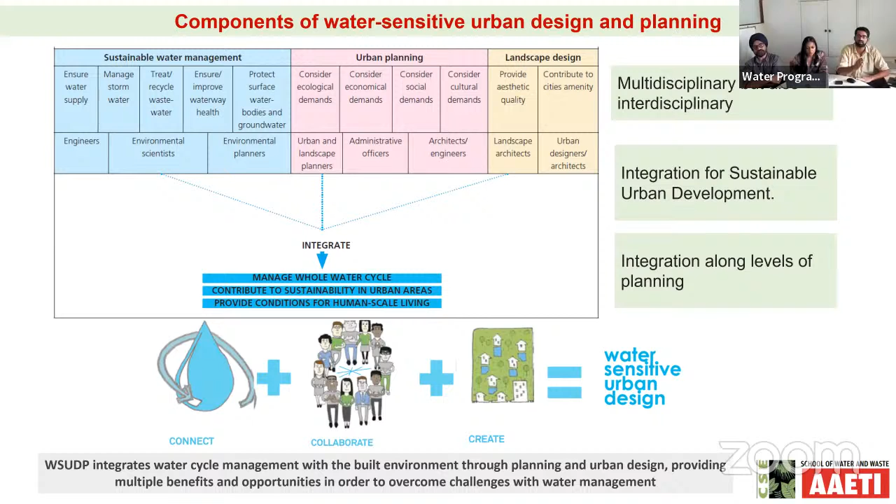The approach requires a combination of actions by engineers, planning officials, and landscape designers. The idea is that it's always a multidisciplinary approach, which hinges on the participation of the community as well. So the approach might seem like it comes from a top-down thing, but it's actually a bottom-up implementation, as shown by Mati sir, where community role is very important to make sure these interventions are sustainably implemented and maintained over time.

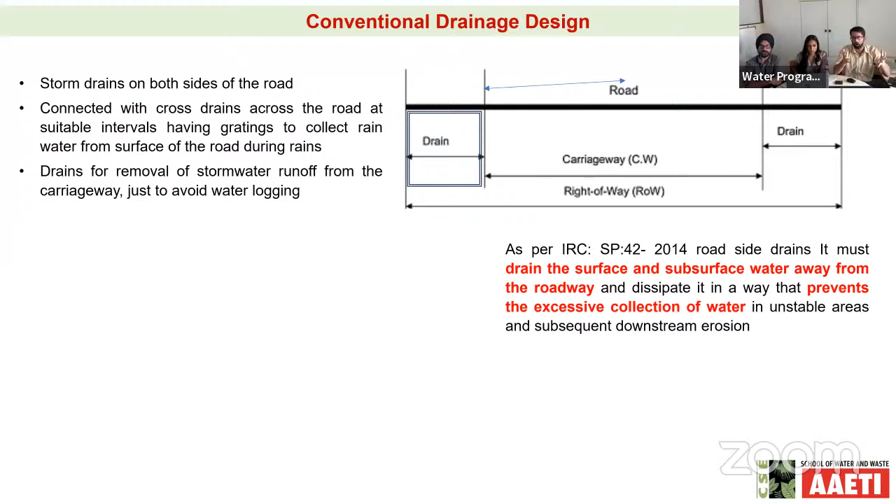Looking at how we conventionally plan our drainage, because the issue is flooding, the guidelines say we should have a stormwater drain on both sides of the roads to cater to the runoff. We looked at the IRC guidelines, and the idea was that the drain should take the water away from the road and not let it waterlog on the asphalt. But the guidelines for designing these drains are a little in contention, because at CSE we feel that in terms of climate change, roadside drains alone cannot handle the extreme runoff.

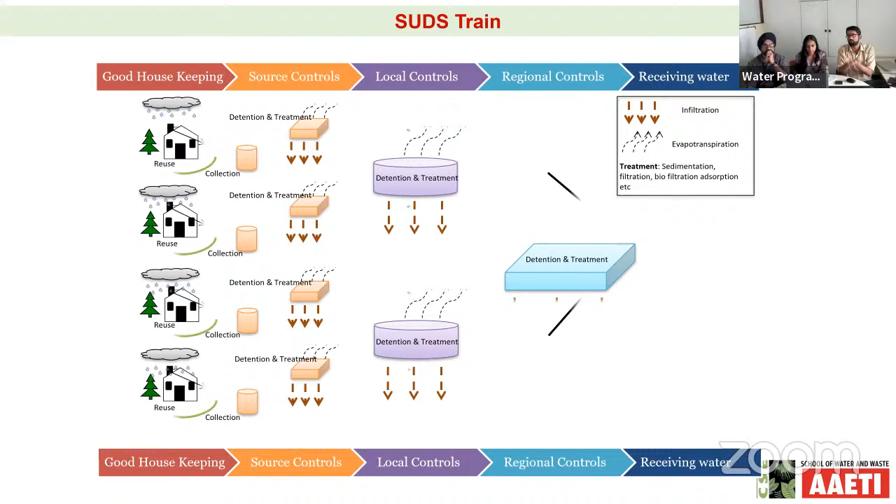So what is the solution to that? Do we modify our design standards to include higher levels of rainfall, meaning a bigger drain, or can we augment these with other systems, as we propose in this session? We propose that roadside drains need to be augmented with something called a SUDS train, where we look at source control and sustainability, planning a chain of infrastructure across open spaces and urban fabric in cities, augmenting the existing drainage system to manage runoff through retention and moderation.

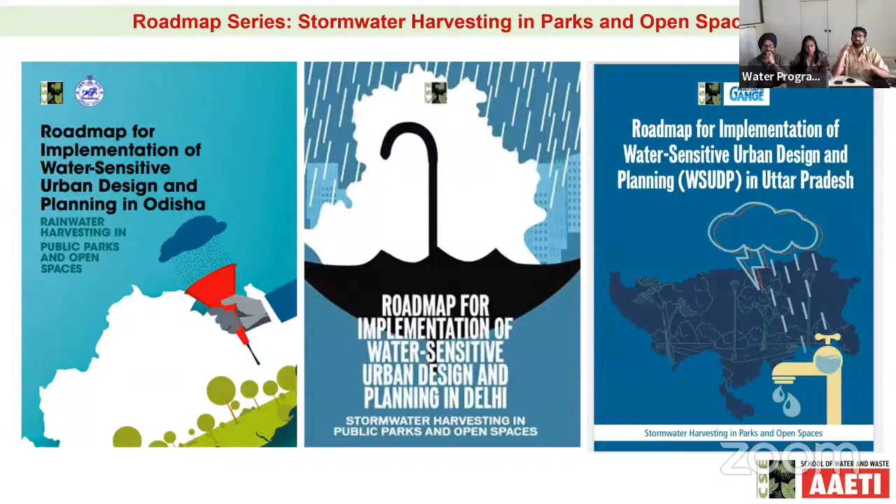So looking at stormwater harvesting directly, we did three reports, a roadmap series. The first was in the MOU with Odisha government, where Madhya has mentioned. The second and third are also in the NMCG project. We're looking at stormwater harvesting, the potential of how much runoff can be handled, and what is the way to handle that runoff as well.

Looking at Delhi, we wanted to use it as a case example. Delhi has an area of around 1480 square kilometers, with as many as 161 official flood hotspots identified by the PWD department. We've also seen that the city has a very diverse groundwater regime, where the southern part has a very poor table, but near the floodplain it's actually pretty good.

But the idea is, can we use stormwater harvesting in parks to actually address depleting groundwater and flooding issues in Delhi? So the idea was to identify some pilot sites in the city and see how much water we can actually harvest.

Based on information collected on ground, there are more than 16,000 plus parks in Delhi, and we tried to map them spatially across which urban local bodies they fall into. We looked at the parks under the Municipal Corporation of Delhi, which is 95% of parks under them, and found we can actually harvest a little more than 3,400 million liters annually.

So the idea is that this runoff, which we think we can harvest in parks, is actually flooding your city on the roads. That is the entire idea of trying to understand how we can advocate this number to decision makers and see to it that changes happen at the policy level.

How can the master plan identify parks as flood sinks? How can they allocate land for such structures in these parks and open spaces? We also looked at how, as a larger city-level figure, Delhi can actually harvest around 12,000 plus million liters of stormwater through its parks alone. So that's the kind of numbers we're looking at to address flooding issues in cities.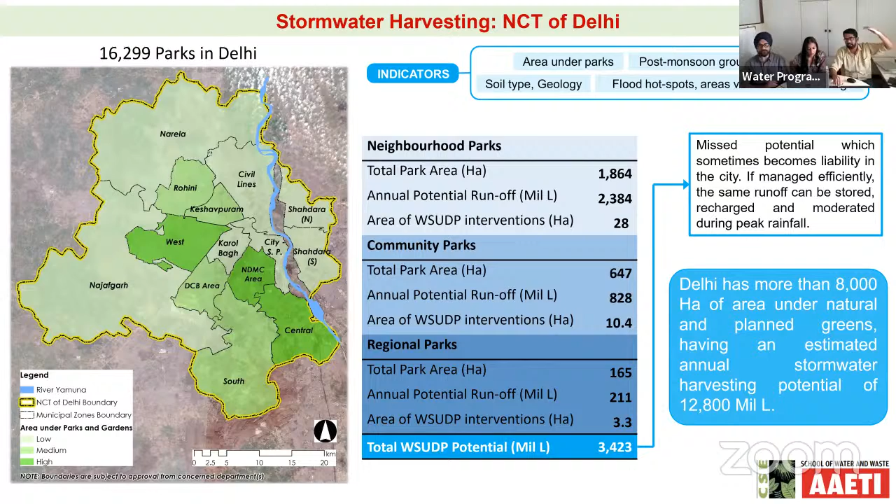Based on the analysis and the flood hotspots in cities, we identified 3 pilot parks in South Delhi, where we looked at flooding hotspots in these parks and the conceptual plan for WSUDP, determining what sort of structures to implement to actually manage these parks.

Based on our estimations, we've seen that in these 3 parks alone, we can address as many as 7 flooding hotspots in the city, implemented by the urban local body. Thankfully, the O&M is done by the RWA itself, so the Delhi Parks and Gardens Society pays the RWA to maintain these parks so they can handle such structures. We recommend structures like swales, rain gardens, and detention basins for these parks as well. We estimate a total of 59,000 kiloliters of water being harvested in these 3 sites alone - an immense resource we want to save, which would otherwise end up flooding roads.

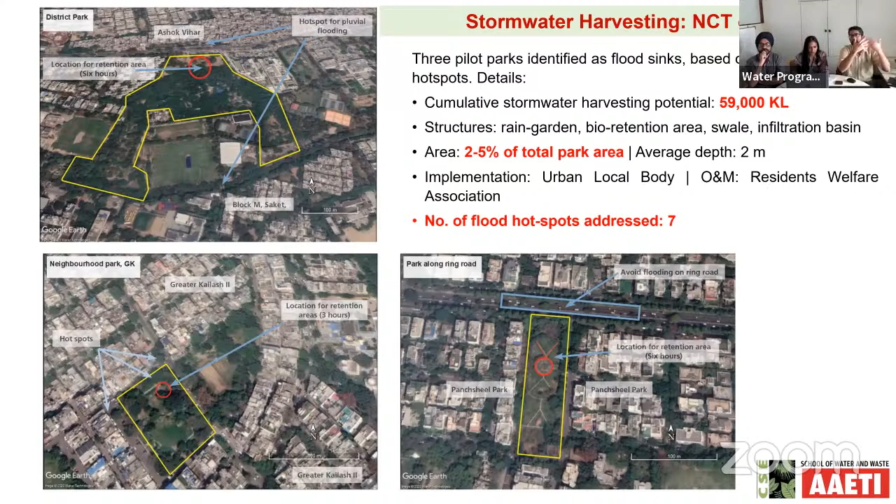We did a similar study for the state of Uttar Pradesh as well. And one more thing in Delhi was using lakes as stormwater harvesting.

There's a case study in Dwarka where stormwater from the trunk drain has been diverted to revive an urban lake. We've seen cases from Bangalore and Delhi where wastewater is used to revive lakes, but this is another example of how this lake was encroached by the DDA itself into a park and a footpath - a planned encroachment of lakes as well. Due to community action, the lake is being revived, and the model is that the trunk drain coming into the city is diverted to fill water in the lake, and now it's a thriving water body in Dwarka.

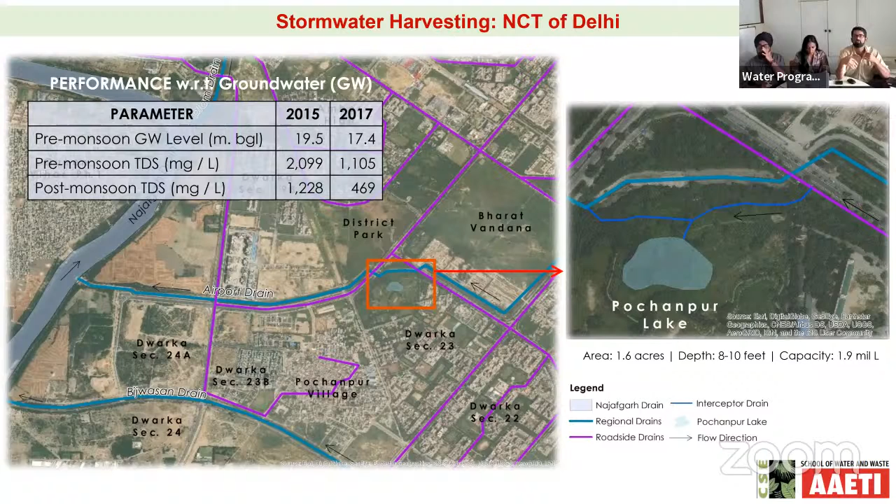The results have been good because this stormwater harvesting has improved the quality of groundwater available in that particular area. So the idea is to look at parks either for managing runoff temporarily or at a larger scale, and to see stormwater harvesting as a component of lake management as well.

Moving forward, we did a similar study in UP for 5 cities, and found that we can harvest 2,600 million liters of water in parks across these 5 cities as well. We also did a survey in these cities to see whether the parks have the space to implement such infrastructure, and we found that it's not there.

So the idea is also to look at how the master plan or policy advocates allocating space for SUDs in parks. In Delhi, the draft master plan advocates that all parks should have at least 10% area reserved for implementing SUDs features across all scales of parks. That's an impact we want to show, because as a land use planner, you'd want to know this - space is a crunch to implement these interventions, and allocation of space is very key in all these systems.

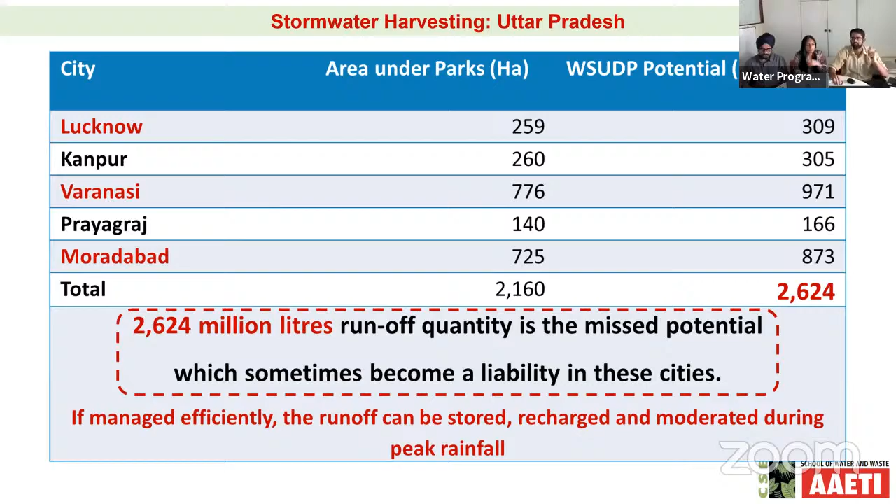You also want to look at some examples from the Uttar Pradesh study. Lucknow is an example where we looked at 3 to 4 parks of different scales, and identified what sort of structures we want to promote in these parks. We found that they don't take much area - maximum 5% in larger parks and 1 to 3% in smaller parks is used to implement SUDs features. The idea is that they not only improve your flood management system, but are also aesthetically pleasing and provide a local biodiversity hotspot.

In terms of planning for these parks, we looked at how an engineer or planner would look at the data availability of these parks. So we prepared this checklist for the Odisha government officials, looking at these data sets to collect as a baseline for parks, and then making sure you identify your pilot projects as well.

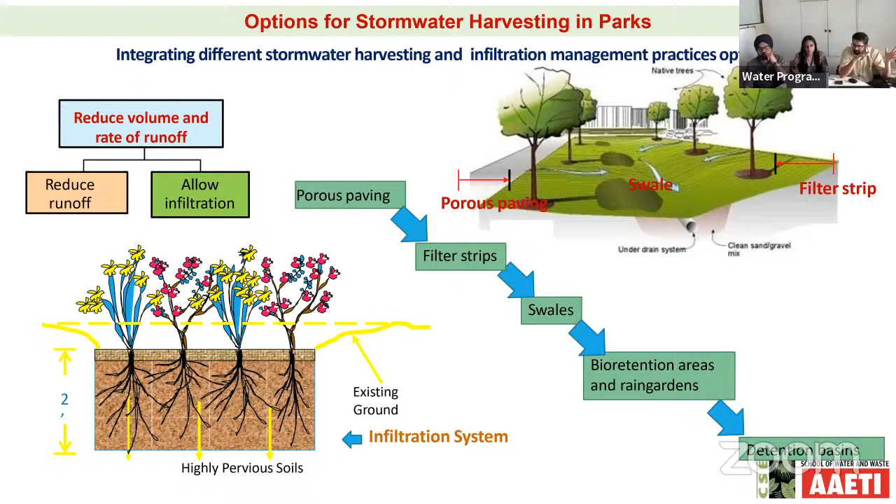The recommendations we proposed were again a system of SUDs train. Remember that parks will have a lot of sedimentation happening because of the nature of the landscape, so maintenance should take care of addressing this part as well. Based on this system, we also prepared guidelines on how to design these SUDs features, be it porous paving, filter strips, or detention basins.

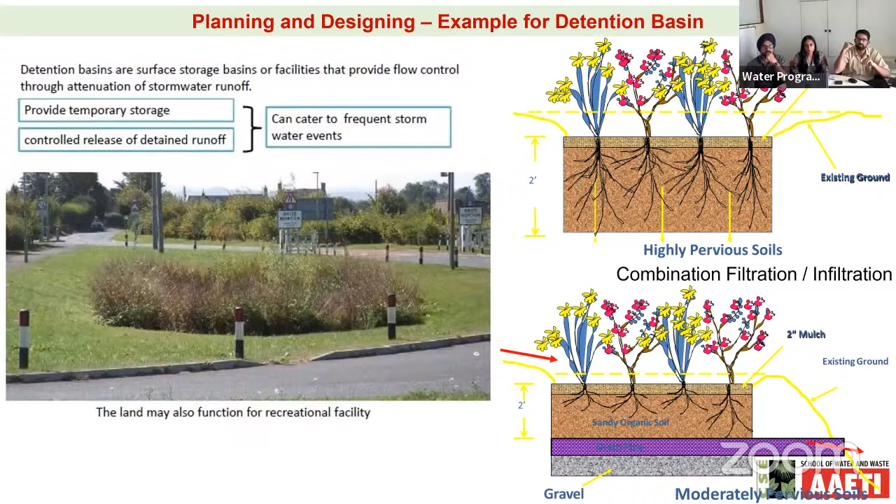One part we found was that this may be difficult to scale up because, unlike CPHEO guidelines for drains, we don't have a CPHEO guideline for such features yet in India. The draft manual talks about solutions but not design guidelines per se. So we urge CPHEO, and we engage with them regularly, to ensure such features have concrete guidelines in place so engineers can upscale these interventions wherever possible.

We also want to look at a WSUDP concept for informal areas. We did a study for Sangam Vihar in Delhi, the largest unplanned area in the city, to look at how we can apply a stormwater harvesting approach there. Delhi has official flood hotspots, but Sangam Vihar isn't one of them because it's not reported—though from my experience it is entirely flooded, and the small streets don't have space for drains. So we can look at natural topography; the open spaces I mapped out are used incidentally for dumping garbage or parking cars. Can we use these open spaces in combination with small ponds for stormwater harvesting?

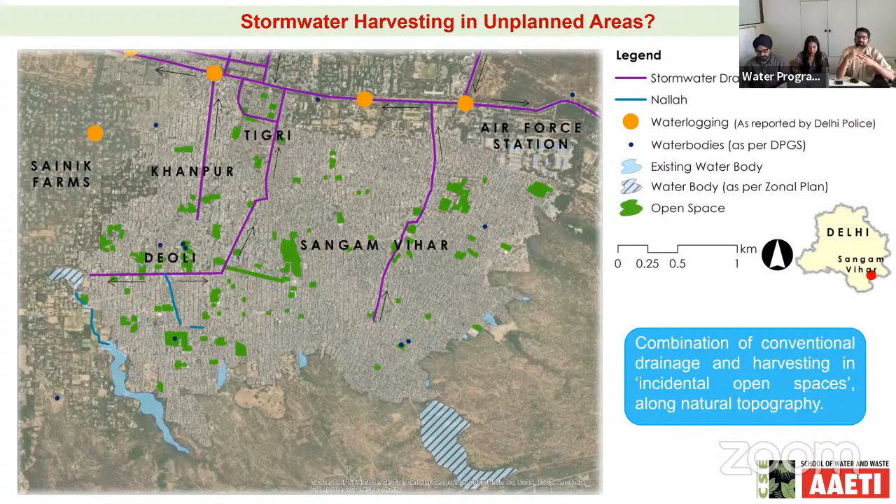It's often discussed that WSUDP interventions may be seen as implemented only for the rich or the elite, but we are trying to develop a narrative around using this concept for low-income areas as well, combining conventional systems with WSUDP systems, mapping the baseline contextually. That's what we've been trying to do at CSE in stormwater harvesting, looking at interventions at different scales and urban contexts.

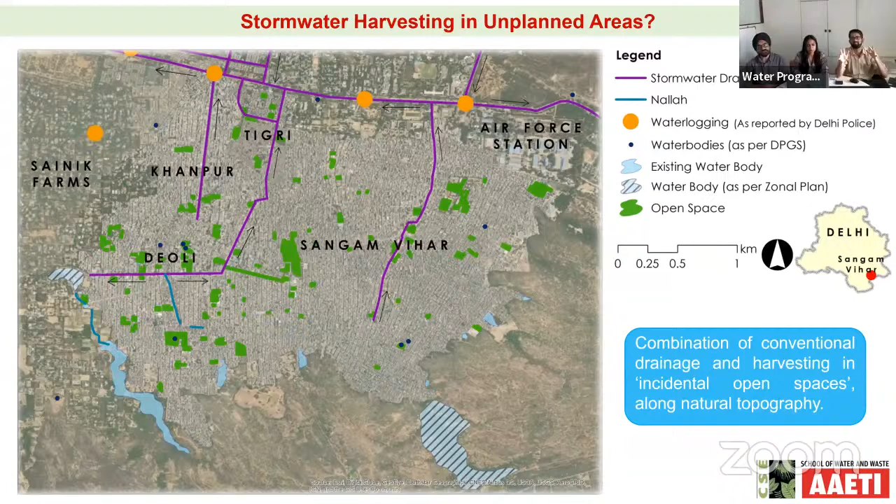So again, thank you for this. Yeah, thank you.

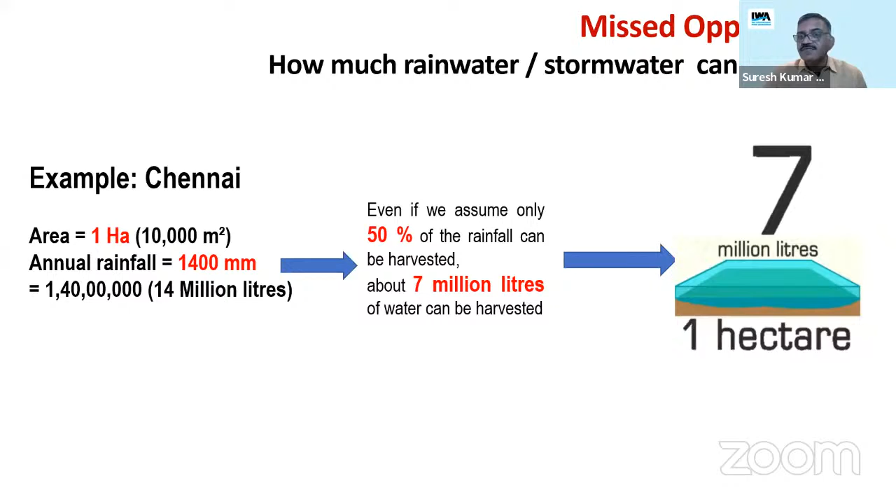But the challenge in front of me, when I joined CSE after experience in academics, yes, people say there are some international ideas we bring in, no doubt. But I am also the one who has traveled to villages in Rajasthan to see the smallest talabs and ponds which were there, having worked with Rajendra Singh ji and Anupam Mishra ji at the early stages.

There was a challenge of innovation in policy and practice, and bringing those good ideas into practice. The challenge was of scale, to bring that change at a scale, and challenge was of capacity. I took over at CSE as head of the Center of Excellence of the Ministry of Housing and Urban Development, where they said you have been promoting some good practices of rainwater harvesting and decentralized wastewater treatment.

At that time CSE was receiving thousands of requests, and we were trying to service those requests, designing rainwater harvesting structures for houses. But when we did research, we found that these structures were not able to tap even 5% of the total potential of stormwater harvesting. Then we realized that the strategy and approach needed to change, and the country had to innovate in policy and practice.

So we came across the fact that there is a city governance system which looks at the way water will come to the city. As a village becomes a town becomes a city, you start planning for networks and services. But we need to leapfrog. That was the big challenge: to become a water-wise city, we need to leapfrog.

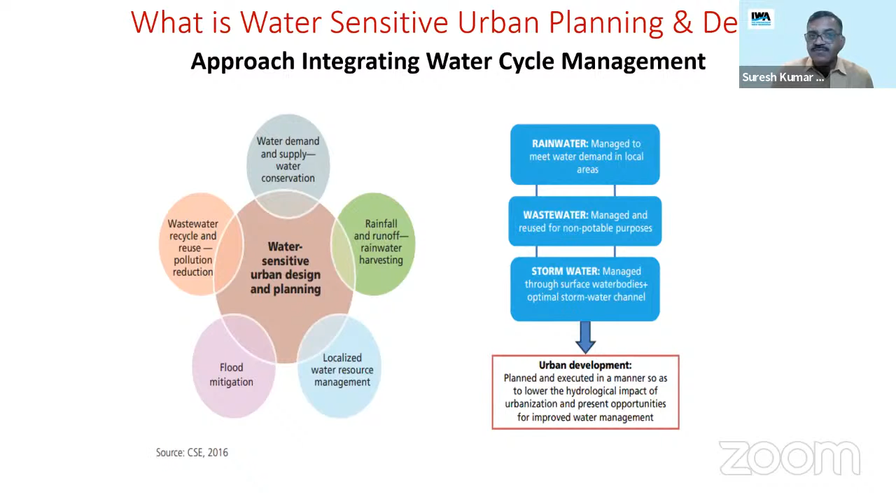Some of these slides I'll skip quickly, because the approach of integrating water cycle management is not just about lakes or green infrastructure. It is about linking urban development, like we redo our house after 15-20 years and come up with new ideas. It is to say that if the city was designed earlier in a different way, we could possibly redo some things in a better way.

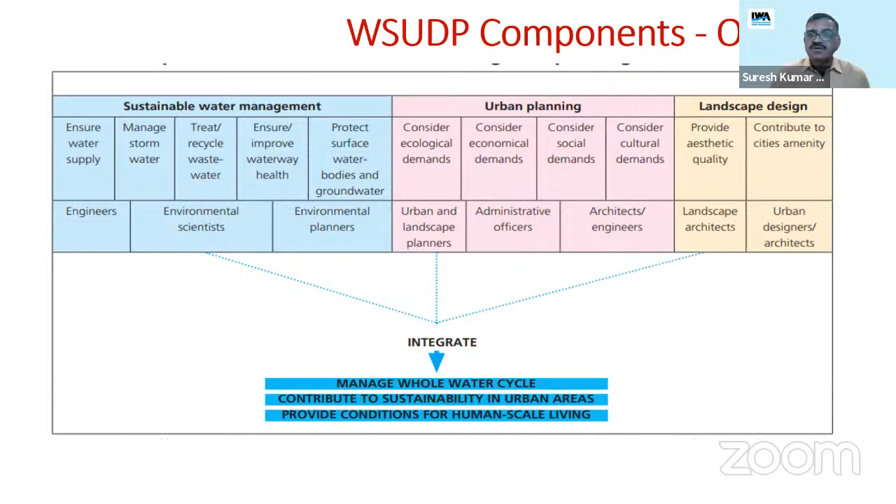So I'll skip a few slides. Dhruv has taken care of these, that it is about integration of ideas, practices, policies between water, urban planning, and landscape, and this has to happen at scale. It is not just one lake we are talking about, or the community around it. It is about how that lake fits into the larger picture. There is a catchment also.

Lakes, when we talk about in Bangalore and other places, we only see as storage. Other places you need to do that. But however, there are several lakes being lost every day in that process. So that is the vision when we have a water sensitive design and planning approach.

This whole story of building knowledge is not just about international knowledge, it's about international and local knowledge. It is about documentation, skill, capacities and innovation in all three areas. It is about training materials developed over time, tools and trainers being trained, and moving from a community of practice and departments not taking ownership, to today becoming a national movement, a state movement.

And Odisha is the first state to come up with water sensitive design and guidelines. It is also a story about knowledge transfer - awareness raising, training and education, advisories issued. And that's what Dhruv was saying.

I remember a discussion with the CPHEEO advisors, largely from the Indian Institutes of Technology, where we had a big fight, I would say, trying to say that we need to hold back the water. And we issued the first guidelines on how to hold back the water as part of the National Sustainable Habitat Mission. That was the advisory.

And you can see these are public domain documents. We have case studies, which my colleagues have presented as part of my leadership when I was at CSE. We have done excellent research.

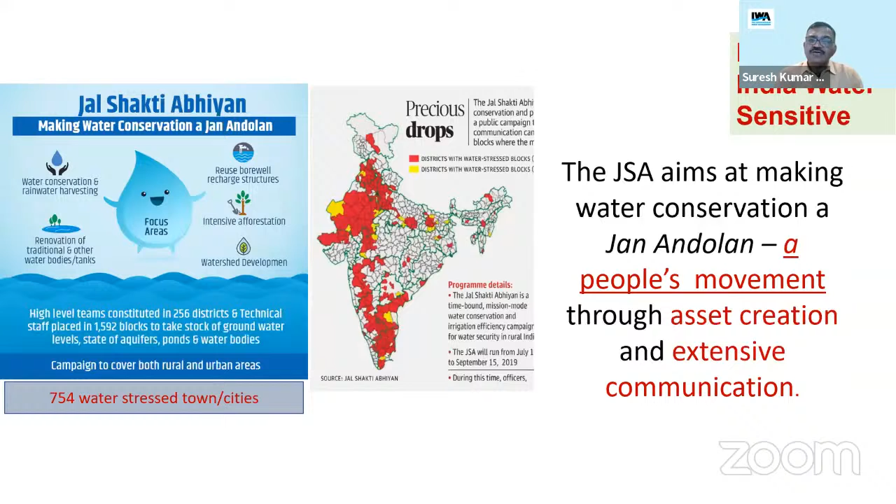There is the Jal Shakti Abhiyan. They have started with a few overexploited blocks, which we have lost over these 25 years. But there are several other areas, the white parts on the map, where there is not yet that much exploitation, and we need to scale the change and sensitize people to make this a people's movement.

Frankly, I see it as a good success that we have raised this bar to the highest level. Today every city is supposed to make an urban wastewater reuse plan, and blocks and districts must make water conservation plans. Krishi Vigyan Kendras have joined hands. There is a modification in the national flagship program Amrut for 500 cities, with a guideline for urban water conservation, and a rainwater harvesting and conservation manual has been developed.

There is a monitoring framework, and departments and agencies have to upload evidence of what they are doing. The numbers are being taken into account, like the Jal Shakti Abhiyan dashboard, which clearly documents the interventions. This approach has to move from just numbers and tenders to the quantum of water recharged, and the impact in terms of climate resilience building.

I would say it is fixing the broken urban water cycle, and trying to show how we managed to raise this bar and brought innovation in policy and practice. So I would stop here and am happy to take any questions, but I would certainly say it is an ongoing journey. I hope, Depinder, you will keep the flag up.

It is not just about widening the drainage channels, though wherever you can do that, it is fine. But there are several other opportunities, from an individual house with water-efficient fixtures to storage of rainwater in the house, which is also water-sensitive design, to capturing stormwater in the lakes, to catchment protection of the lake, which may be not only in the city but outside it, because every city is part of a bigger ecosystem, a river basin approach.